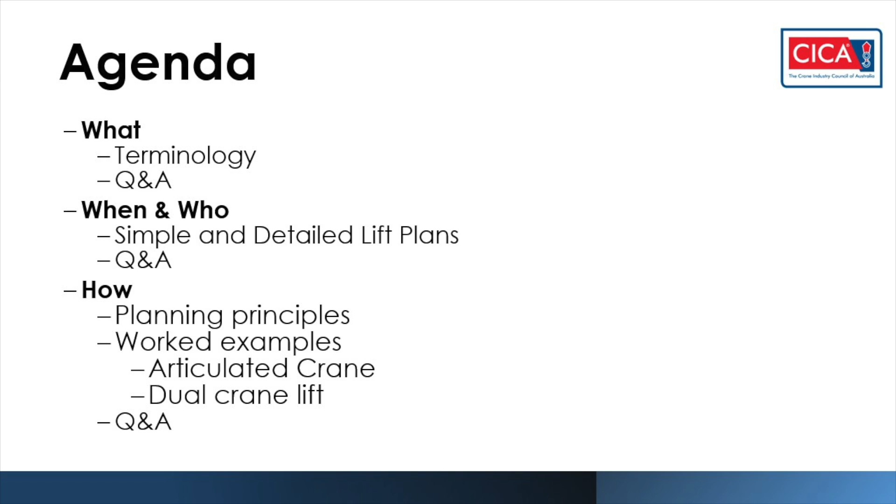If you're game enough to stay with us for the full hour and a half, I think you'll find some very helpful tips that Stuart has collated around what he has found in the industry out in the field. These aren't meant to be things that you have to have 20 years of lift planning experience to understand, but something you might be able to take away today just to be mindful of when you are seeing a lift plan for the first time, give you a bit of a head start.

So in the terms here, I want to just highlight 5 different terms, and we'll address these a little bit different as we go. There's really lift study, design lift, engineered lift, lift plans, and lift procedures all seem to be bantered around in the field without a single point of description that gives any sort of clarity, because I think a lot of these will be used interchangeably.

And that's why we wanted to spend a little bit of time talking about what our assumptions are for this presentation, so that you know when I refer to something as lift study, it may not be what you call it in your business, but it's for the sake of this presentation what we refer to it as. Additionally, we'll talk about what's on the horizon for even some of this clarification, as I mentioned before.

So firstly, I want to reset the topic of lift study.

I don't want to talk about lift studies as they might have historically been ten years ago, where they were a glorified lift plan that included a lot of detail. You could almost consider the lift study as a lift report. These were historical ways of completing a lift study.

What I want to talk about in the current state of play is the lift study being more of a methodology assessment. I've got two examples here to try to highlight this stage of the process that's occurring.

Many of you might host high-risk workshops. At the early stage of these workshops, you'll be evaluating the feasibility of different options for your lifting activities. Constraints that may dictate which option you select could relate to site access, and what's available on site for not only the crane to perform its work, but nearby obstructions. Is the site a postage stamp?

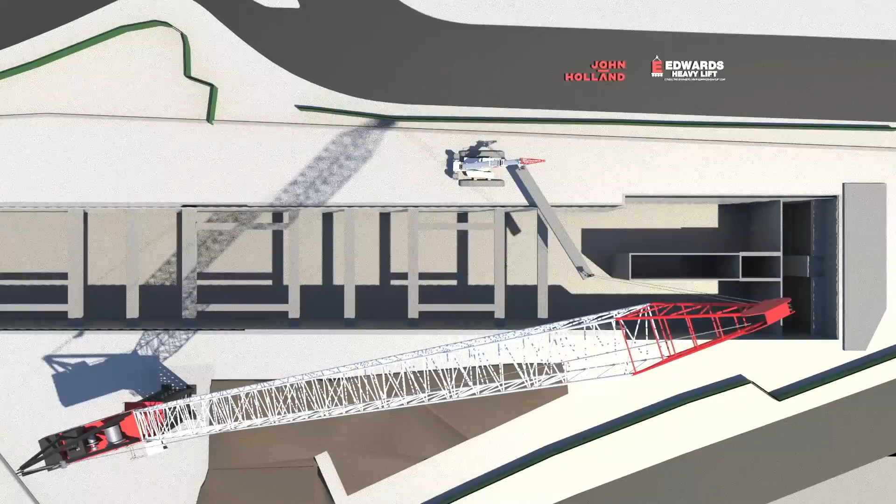The crawler had 5 parts of line with a substantially slower hoist speed compared to the tower crane's 2 parts of line. Communication was key, and the secondary dogman checked the alignment of the tower crane boom and the hoist rope while the crawler picked and carried.

This was critical to the operation, as the crawler was at 90% of capacity, where a minor difference in alignment could have pulled the tower out of radius and side-loaded the boom. Stuart will go into more detail about this and why it's an important thing to consider.

It's the actual side loading of the boom. When we talk about multiple crane lifting, it's more than that, and I'll elaborate slightly. That's a very critical area in the lift planning stages that needs to be understood.

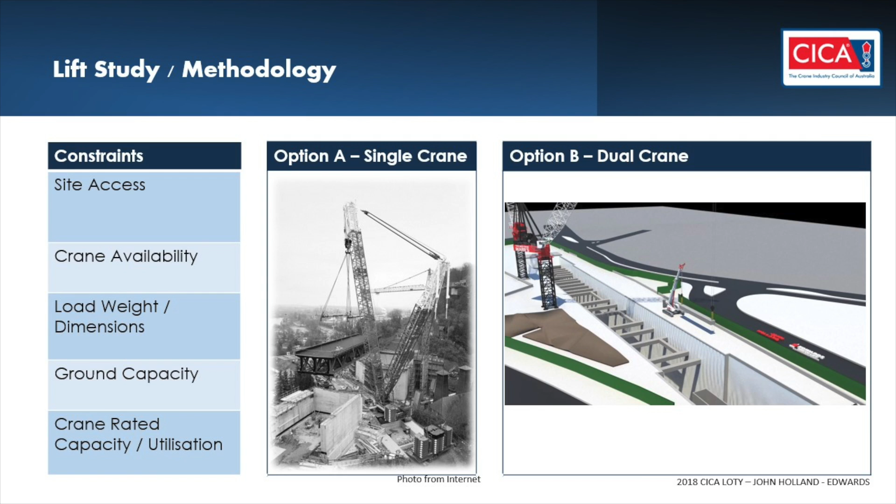So I mentioned resetting the conversation around design lift as well. Design lifts, I want to set a baseline, are defined formally in Australian Standard 2550 Part 1. This is the definition. I put it in here not because I want to read it to you, but I think it highlights that through our sloppiness or looseness in terminology, the original intent of a design lift has been lost in industry.

Now design lift is synonymous with lift planning. If you go back to Australian Standards 2550 Part 1, it really centered around the need to make an adjustment on the crane to consider an extraordinary lift. And I just want to throw out, for controversy a little bit, the notion of an extraordinary or temporary lifting operation. How many of you would consider extraordinary lifting to be installing bridge beams or putting in concrete precast panels?

These things are now commonplace, and we sometimes refer to them as requiring a design lift, but that's not its real intent. I'm going to implore you to consider we stop using the term design lift, because it's a misnomer from its original intent. To be fair, the Australian Standards are in the process of reviewing this standard, in particular Part 2550 Part 1.

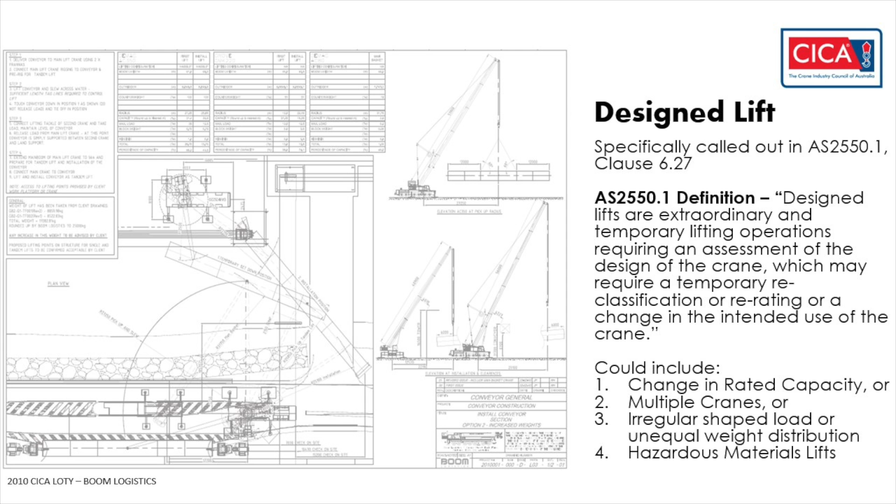The design lift definition will likely be revised to be more representative of industry practice, or potentially deleted altogether, to really focus on things like lift planning, which is more commonplace and common vernacular these days.

So the other term that gets bounced around, synonymous with design lift and lift studies, is this notion of an engineered lift. To add to the confusion — I'm not trying to throw Australian Standards under the bus, because CICA is certainly involved heavily in them — but I do want to highlight that if you're looking for standards to bring clarity, there's some confusion arising here.

So engineered lift is not actually defined in any crane standard. It's only defined in a rigging standard for chain slings, and when you read it, it reads just like the design lift definition we just looked at. I think this exacerbates the confusion, the problem. What we're hoping here today is to stimulate some conversation about how this might be clarified and resolved.

It is important, though, that we do make a place for engineered lifts. Why I bring that up is the design lift definition in the previous slide does not actually mandate the need for an engineer. However, as you can see in these activities listed here, I would make the argument there are clear reasons when an engineer should be engaged.

And it's not just to keep engineers employed, but to deal with particular activities that are beyond what's common in lift design and using cranes to their rated capacity. There's a space for this in what I'll refer to as sharpening the pencil — making sure your I's are dotted and T's are crossed when dealing with things like considering re-rating the crane, or rigging arrangements that have unknown or atypical forces brought through them.

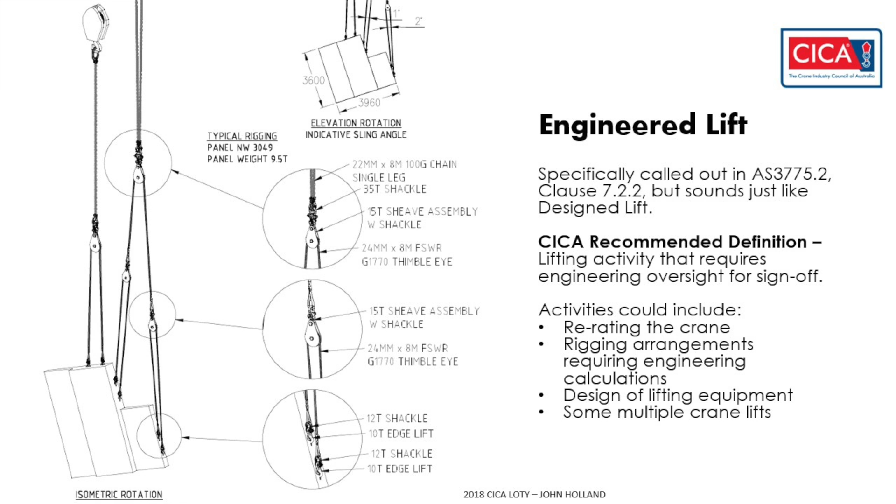So what I want to spend most of the time talking about today is actually resetting the conversation. I might be using words here that don't line up with your existing company policies, but I'd ask that you consider this a conversation, and hopefully the Q&A will enlighten some of the difficulties you might have with what I'm saying. What I want to focus on, instead of design lift and engineered lifts and lift studies, is lift plans.

More and more these days, lift plans have become the mainstay, and they've become the summary for what is used in the field and also what is developed in the office to take to the field. In many cases, they're the guiding light in lieu of design lifts, engineered lifts, and lift studies.

So what I propose is looking at this in two halves: indirectly documented and directly documented. Within directly documented, not always going to the full extreme of an engineered lift plan developed by the engineer—there's a place for a simple lift plan, and a place for a detailed lift plan done by non-engineers or engineers. I hope this will give us a chance to talk through this.

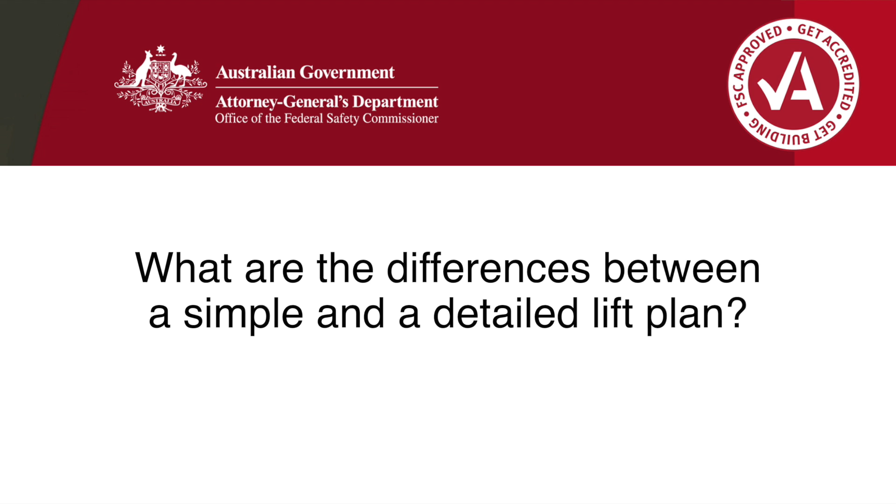There's different codes. Queensland's very specific in that, and there's other information, but primarily we use a risk management approach in how to get that.

By the way, don't mean to talk too much, but I loved your movie analogy. Very good in the risk management sphere. Not everything can be high risk, nor should it be. It's a good one there.

Just a bit of context about those two, simple and detailed. Coming back to your question about what's simple versus detailed, looking at that graph on the slide a second ago, we don't want the simple to be too onerous. So you'll see less detail within the simple lift plan. I'll show examples where we've almost amalgamated a pre-start form with a take 5 and elements of a lift plan. The detailed lift plan doesn't have those pre-start take 5 risk assessment elements.

The aim of the simple is this is a lift plan that's done in the field and on site. It's most likely going to be done with a crane that's a single crane, single hook lift activity. It's not done with intricate CAD details. I'm only going to show you the first page of the simple lift plan form. It doesn't go through the detail around doing a hand sketch, and I think that's often overlooked or neglected in industry. The value of getting the crane crew to talk and just sketch it out - it visualizes what's about to happen, and things can arise in that conversation.

The detailed lift plan will spend more time focusing on the impacts of a crane doing a series of sequenced events, and you'll see that we've broken out the detailed lift plan to consider the weight of the load, but also the capacity of the crane in that configuration, what's happening when the crane is slewing or traveling, and then lastly what happens with that load in the crane when it comes to placing the load. So we're looking at things in the detailed lift plan that relate to interaction between one crane and two cranes, and that's where we start using some of the multi-crane lift deratings outlined in 2550 - the typical 20%, 33%, and so forth.

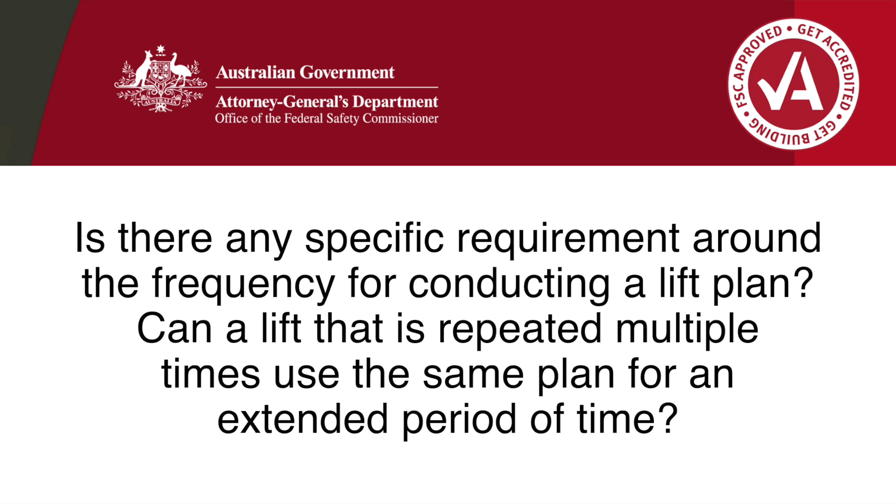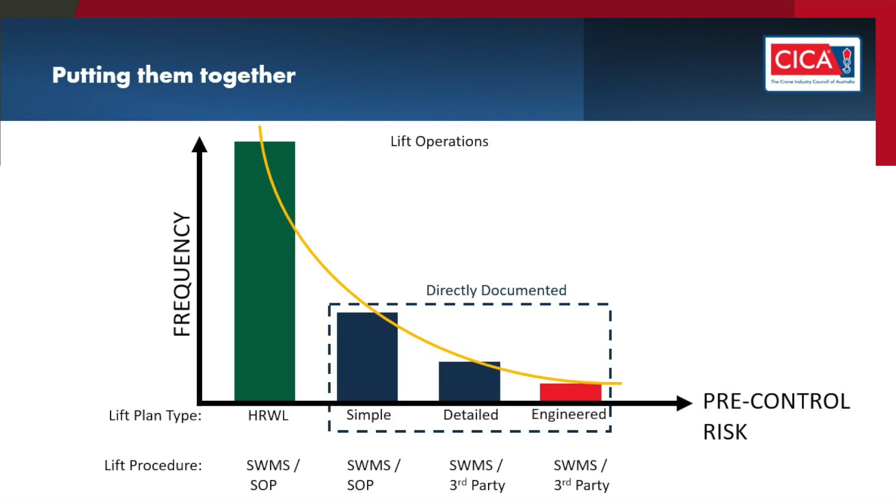I think that previous graph, I might go back to this one. The point was to keep people thinking. It's easier for people to mandate something versus use their brain. The reason to equip people with training to do simple and detailed lift plans is as much about knowing when to elevate it to a higher level of capability as it is about determining when the risk is mitigated by addressing the worst case scenario.

Like using Mohammed's example, which is very common. I certainly hear grief from members asking the common sense pub test, if you will, around whether, if you've designed for worst case, that shouldn't be sufficient if other conditions haven't changed.

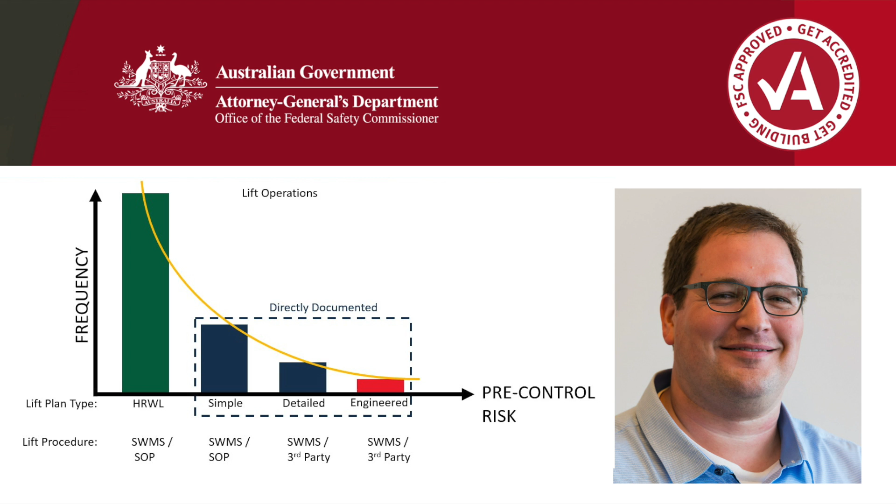So if you're picking and placing multiple loads, even within an existing crane setup where the crane's location isn't changing, but you've assessed the condition in the lift plan to its worst case scenario—whether that's the farthest radius or the heaviest load, whatever you've selected that scenario to be—given all other conditions are less than that, the first assessment should be sufficient and cascade through the others.

The classic example is the sound barrier install. Even to a degree you saw in that animation video, there was a repetitive load, even though the orientation of the load changed each time. I don't think a full investigation was completed each individual time, but it was done based on the worst case and then backfilled from there.

I think the more we can get people to use some of that common sense, hopefully that will mitigate the excess, which again makes things trivial.

If you didn't like The Incredibles, think of it in a different context. How many buzzers does a piece of mobile plant have? It has a slew buzzer, a backup buzzer, a horn. If you start creating so many buzzers or slight variations of each, you start getting lost in what it is. We've got to reset how overly cumbersome we've made something.

I will try to give some guidance related to when you might choose to do the lift planning in the next slide. We've got other questions coming up at different points, so if you can hold them over to those, that might be the best way. Keen to hear the next section, please, Brandon.

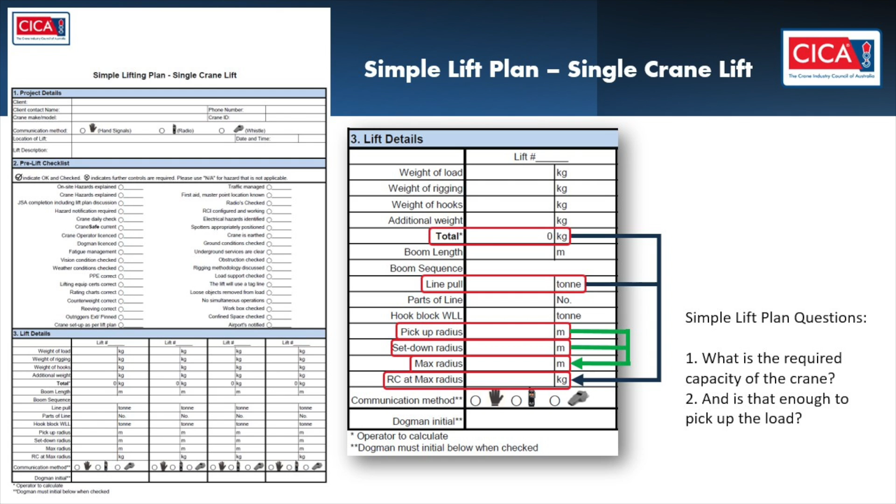So in this simple 10 lines, you're trying to assess what is the weight that needs to be picked. That's our first question. What is the required capacity of the crane in that radius configuration? Is that enough to pick the load up that you'd like to pick up? That's as simple as it gets. It deals with talking with the crew on site to try to develop this and then come out and perform the lift.

I'll ask a bit of a controversial question in this slide. When we use a simple lift plan, this idea of, and I'm asking the question more so from just relying on the high-risk work license holder to determine it. So I'm not saying this in the context of going from a detailed lift plan down to a simple lift plan. I'm talking about going up from a high-risk work license holder managing the rated capacity of the crane and the desired load to be picked to justify the need for a simple lift plan.

First question to ask, does the risk level warrant it? Do your own internal policies say we need to perform a lift plan because of those 5 options that I raised before? I put in here the value of the load because the essence of the simple lift plan is to document the thought process to say you've accounted for, I would say, a general assessment of the situation. It's not the precision that a detailed lift plan will go through that we'll look at in a second, but it's a general review, which is why we are just saying what's the pick, what's the set radius, what's the maximum radius, are within rated capacity. That's the other part of it.

Sorry, when I say risk level warrants, the percentage of capacity. It doesn't cover off things that are operating necessarily at the 90%, 95% capacity of the crane, because you want to have more detail around some of the rigging and so forth, but it is a good process. So would you use a simple lift plan to lift a person?

And that can be something that you already know the answer to from within your business. But with what we've described, is there reason not to? Is a simple lift plan adequate? That's probably more the question.

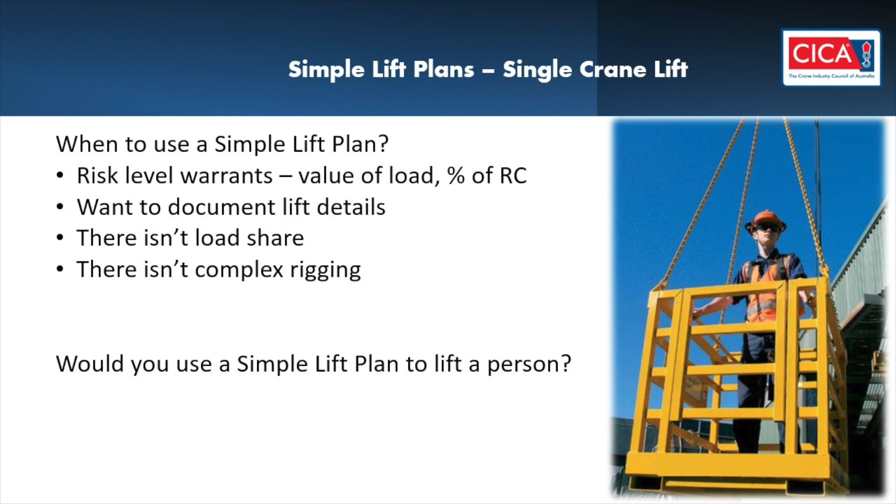If we look at triggers of lift planning, often lift plans are triggered by rated capacity or the weight of the load, as we said.

Here's a quick graph, and I bring up this example of a tower crane because we can put to the side, for the time being, any sort of ground conditions with it being on starter legs. If you look only at workbox as a function of crane rated capacity, at the worst case scenario for this crane, you will only ever get to 23% of the rated capacity of the crane with a fully weighted workbox. That workbox is 750 kilos. The rated capacity at its farthest radius, 70 meters, still has a capacity of over 4 times the workbox load.

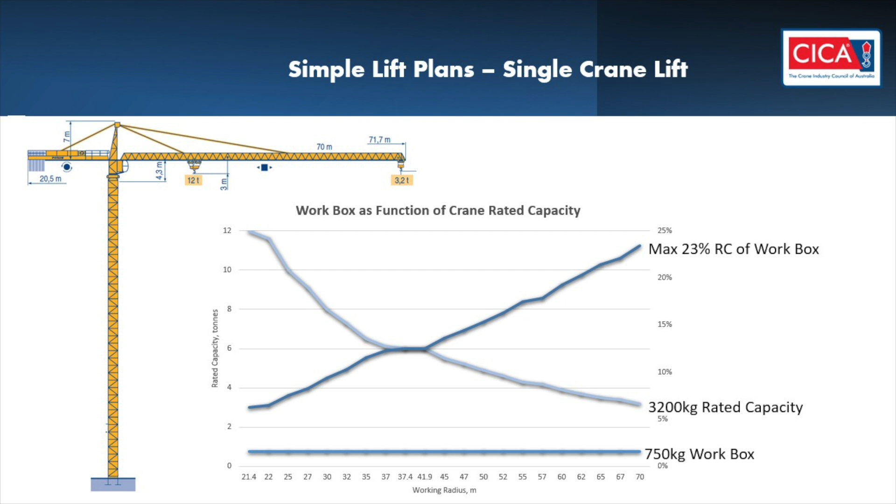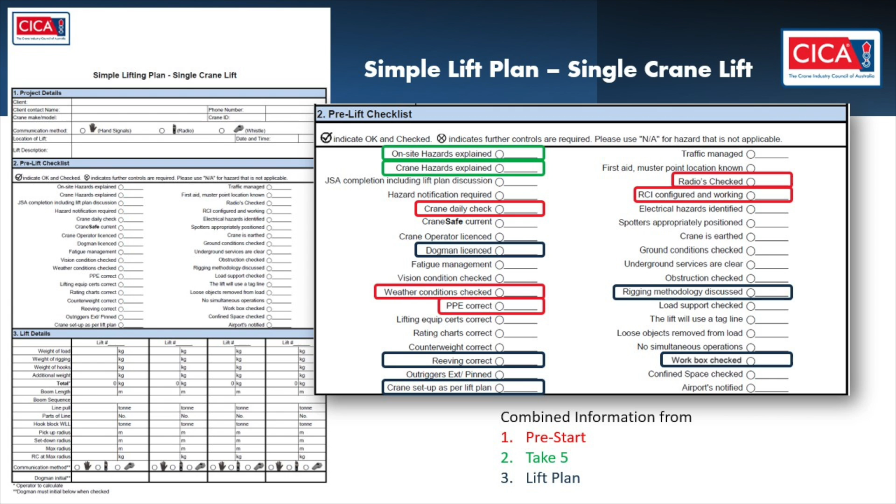If we go to the next slide, I've done a quick example to try to convince you of the options and how we can cater a lift plan for a workbox. Within that pre-lift checklist, we're talking about rigging methodology discussed, the workbox being checked, the reeving correct, which is related to the crane configuration in that instance, and then this lift plan that we'll go through in the lift details is confirmed. That's the radius that we're going to be working to.

So if we just look at these numbers again, if you're picking up a workbox of 750 kilos, your line pull for this particular crane is 3 ton. The pick radius might only be 15 meters. The set down radius might be 15 meters again, because you're bringing the workbox back to its previous location, but you're trolleying out to 30 meters to either reach something, a facade, maybe a chimney, whatever the scenario is. I'm not here to contemplate that, but the idea of going out to a further radius.

In the Australian standards, it talks about using cranes with workboxes. When they've been selected to do that, it only requires a rated capacity of a 2-to-1 ratio. You're 5 times greater than the minimum requirement of the Australian standards, if I try to bamboozle you with different ratios to confuse the matter.

But I would make the argument that a simple lift plan, in the lift plan segment of this—obviously you might have different protocols ensuring communication, having backups for communication, things that relate specifically to a workbox, those are ancillary to this lift plan—but actually setting up the crane and making sure the capacity of the crane is okay, and you've accounted for lift plan oriented activities, I think a simple lift plan is sufficient.

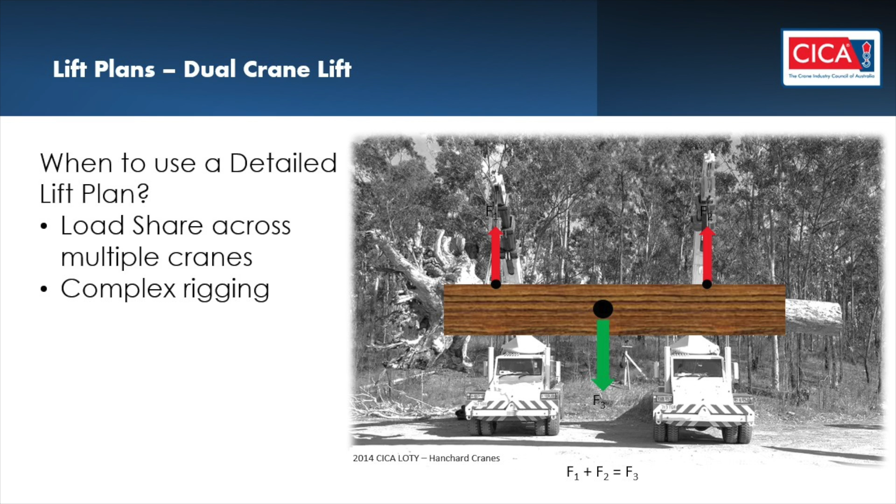The last part of this, you'll get more of a flavor for in a worked example, is the other contributing factors that we want to detail in this lift plan to a greater extent, and that's the consideration for the max outrigger load, ground bearing applied pressure, and bearing pressure that's allowed. There may be something in here for a stipulation of wind speed. Those things are able to be documented in this more thorough or more detailed format than in a simple lift plan.

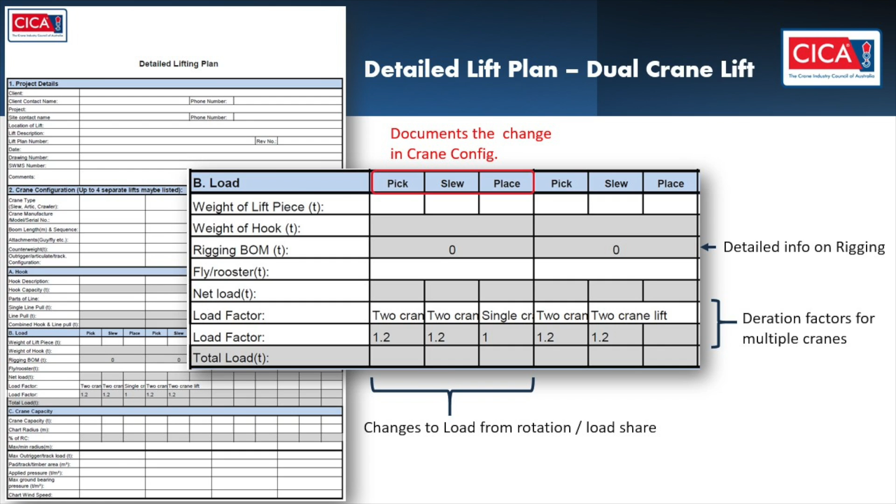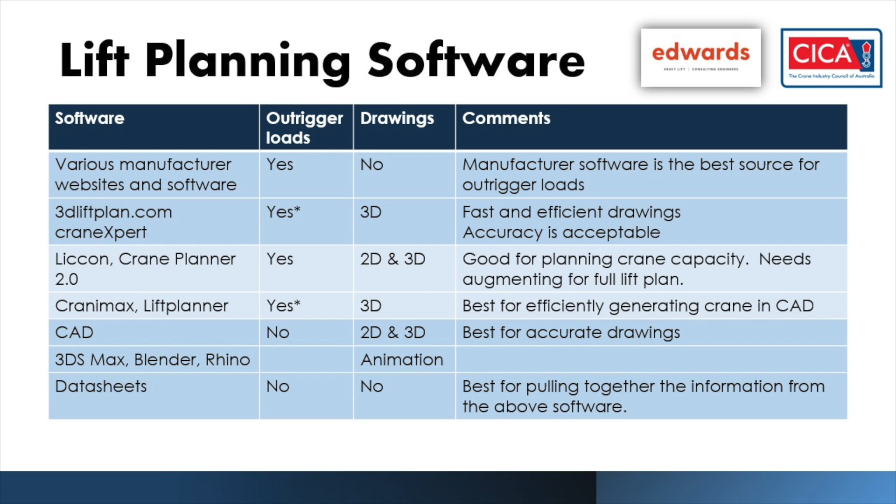Your other sort of animation-type programs—I think the animations are becoming a lot more efficient these days, and you'll probably see more and more animations as technology gets better. And data sheets—thanks for that.

There's been a couple of questions come through. One was regarding ground conditions playing such a critical part in determining lifts. In this case, it was a question from a civil construction company saying they typically automatically go to requiring lift plans simply based on ground condition requirements and needing to validate those. How do you think that fits into the simple-hire order, and when do we need an engineer, when don't we? We've had a bit of description about the planning software, but that's only giving one side of the story, isn't it?

It's very relevant to what was discussed at the last webinar around differing terms—allowable ground pressure versus peak ground pressure, ultimate ground pressure. If geotech is being provided to the site based on this contractor's requirement, I think you can see that even in the examples Stuart showed where ground pressure is provided, the previous point addressed a month and a half ago was about the discrepancy in what information is being provided. If that's wrong, it doesn't matter what lift plan you use. I think you could still get away with a fair bit of just simple calculations.

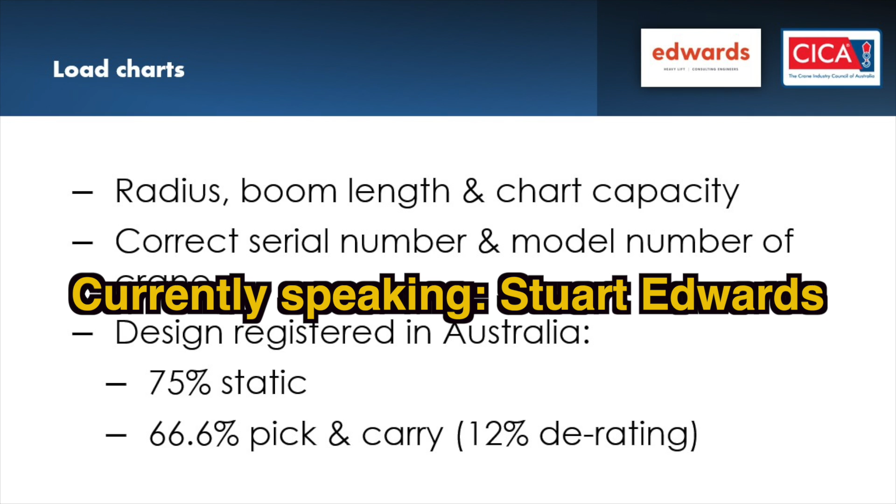So load charts, I'll just quickly run through what to look for, and then Brandon's going to go through a simple example of how to read a load chart. Obviously radius, boom length and chart capacity are the main big ticket items you need to look at.

Other considerations: correct serial number and model of crane. One company I worked for owned 10 cranes that were the same model number but had different serial numbers, and the difference in chart capacity between them was about 10 tonnes. The factory was improving the crane as they made new serial numbers, so it can be quite important to get the correct serial number chart.

Design registered in Australia - this is from the old Australian standard, 75% static and 66% pick and carry. Australia has now adopted the European standard. It's still 75% static, but the centre of gravity is within the 4-degree tipping line. It's a different method for determining the pick and carry rating, but it still roughly equates to similar numbers.

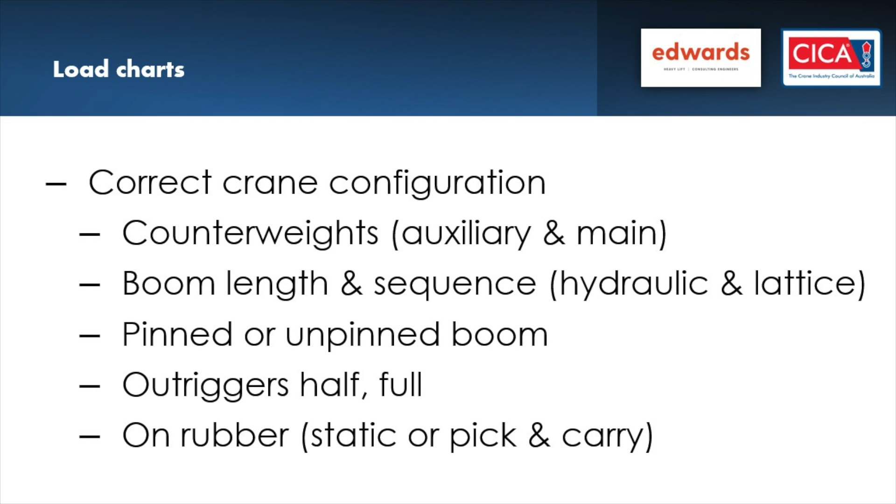The correct crane configuration: counterweights, boom length, the outriggers, whether it's on rubber. There are some on-rubber charts that are static charts, believe it or not, or they're pick and carry, and whether the boom is pinned or unpinned.

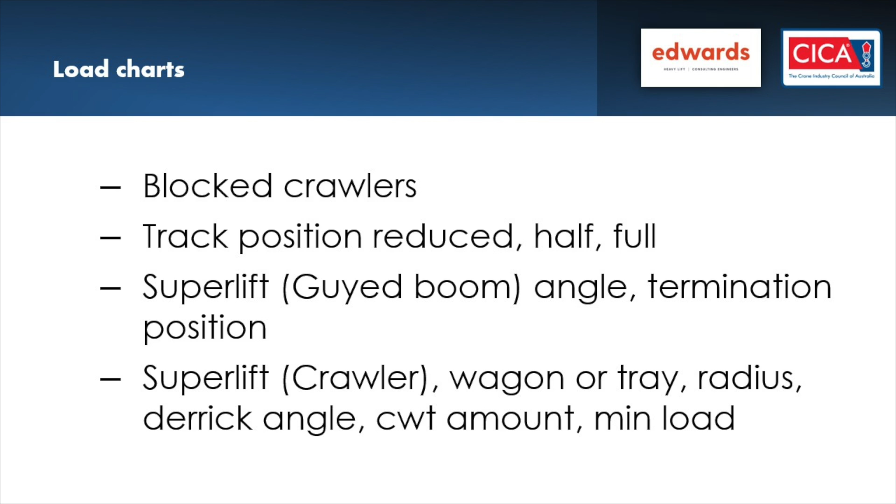Other configurations: the tracks are retracted, the superlift, different angles on the superlift, etc. The slew angle - most modern cranes these days stick with a 360-degree chart, although there's still quite a few cranes on the market that have restricted slew charts.

The deductibles - a lot of mobile cranes, the hook needs to be separately allowed for. If there's a fly stowed on the side of the crane, or catwalks, working at heights sort of things, they're all quite often deductibles from the crane.

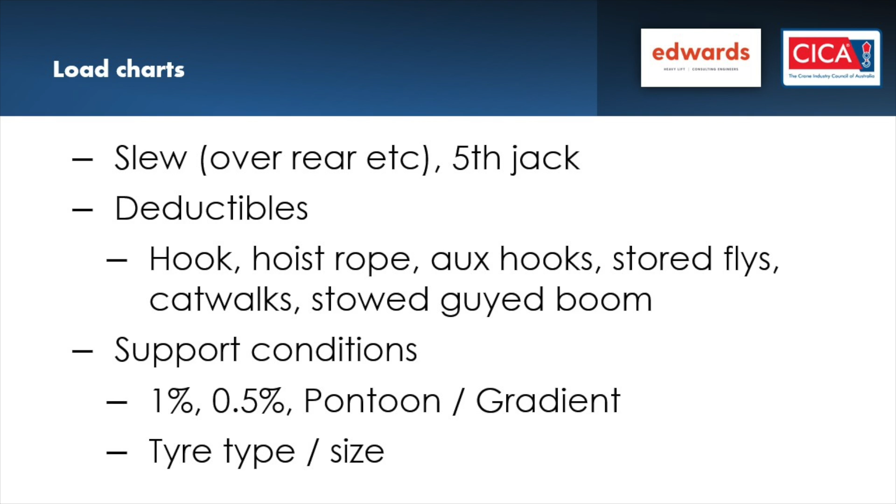The other thing is support conditions. The Australian standard had 1% as how level the crane needed to be. As manufacturers have got more adventurous wanting more capacity out of their cranes, particularly in the bigger crawler cranes, they're putting more restrictive requirements for the level - for example 0.5%. I've seen one crane where the manufacturer requires 10 millimetres out of level in 10,000 millimetres. So that's billiard table flat.

The environment, and whether interpolation is permitted or not. In general, interpolation - that is, if the capacity is given at 5 metres and 6 metres, and you're actually lifting at 5.5 - in general that's not permitted unless specifically approved by the manufacturer.

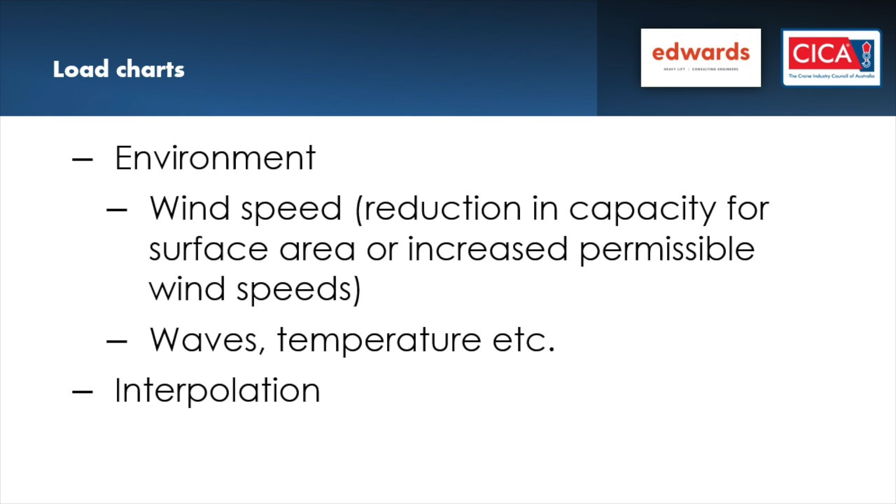After this incident, Workplace Health and Safety Queensland interviewed 40 crane operators. Of those 40, 38 did not know that there was a side slope derating for the cranes - they thought the computer did it for them automatically, but in this case it's a manual calculation. Of the 2 that knew a derating was required for the side slope, none of them knew how to do it. So I'll pass over to Brandon just to go through this example.

Yeah, thanks Stuart. I think those stats, even though we're here talking about lift planning, the stats that Stuart just conveyed - 38 out of 40 people not having a full understanding of how to do this - warrants a quick discussion, a digression, because this information we're going to go through here today ends up only being one line item of a lift plan. No different than all those examples about the correct configuration and so forth that Stuart talked about. Knowing the right input to put in is only going to give you the best option for a correct answer. If it's garbage in, garbage out, we're not winning with performing a lift plan.

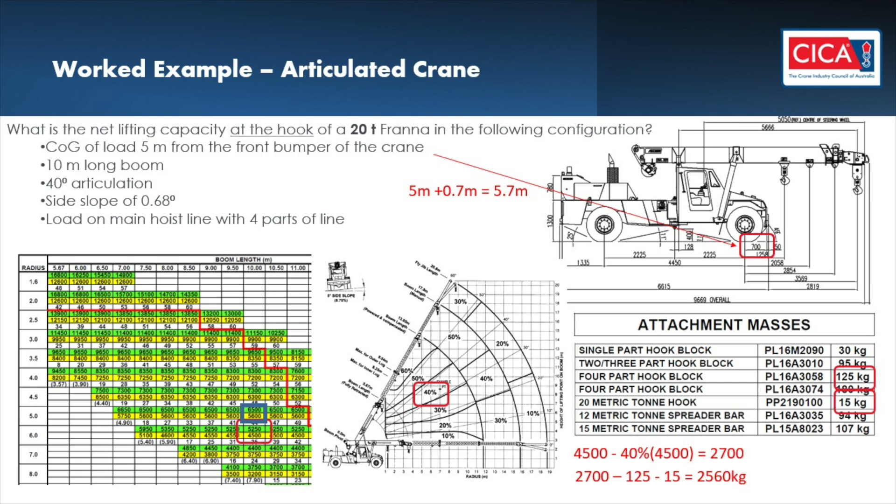I want to step aside and look at this option because it's so common, I'd like to share it with you.

This is something CICA is working on, how to release this as part of this lift planning workshop to those participating who want to utilize this service. A few years ago, CICA and Multiplex created this automated setup, instead of using the manual load charts we just looked at. You can select the AT20 Franna using the winch, then put in the boom length and select the radius.

You still have to figure out it's 700 millimeters from the front bumper. With that information, you can put in the articulation and the side slope, and it will output the allowable load. What I want to highlight in that bottom right-hand corner is something we've added to this software which I hope the industry finds useful. Those four columns are the scenarios that could happen with that boom configuration, the boom length and the radius.

Too often, as Stuart mentioned before, if you recall, a 360-degree chart - on a slewing crane, modern cranes now produce variable charts based on slew angle. He's 100% correct that when you're doing general planning in the simple lift plan option, you should be using the 360-degree chart, or at least be conscious that you're using a specific slew angle chart, because the slew angle chart will always give you a better capacity than the 360-degree chart.

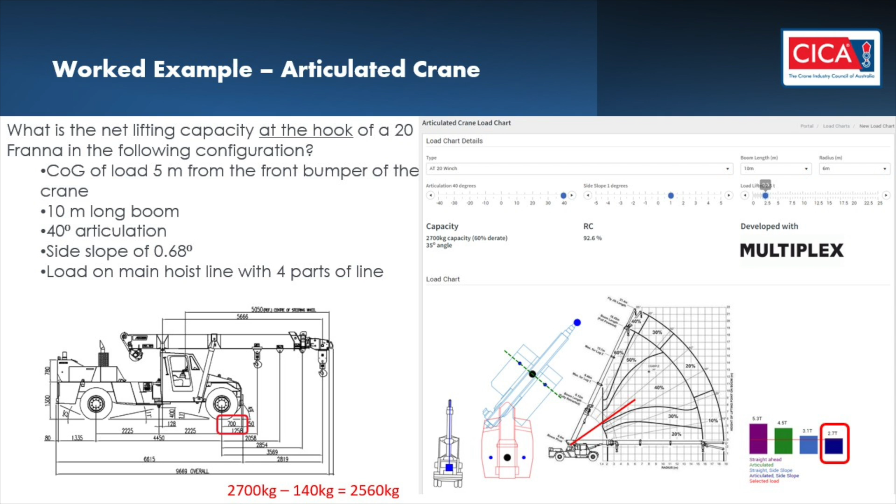What we hope to accomplish presenting the information this way is that when you're planning, even if you're straight ahead at 5.3 ton, you're also cognizant of how quickly that capacity falls off. We're talking 50% there, down to 2.7, if the driving scenario - whether articulation or side slope - changes. In doing that, you can plan your lift at 2.7 ton, even though you might be able to pick the load at 5.3 ton capacity. I just want to highlight this because it's such a common misconception.

The next two slides are just some key lift plan errors that I commonly see with lift plan reviews. The outrigger load provided - the CICA presentation provides quite a lot of detail about what loads to consider, because the software produces an outrigger load or a track load for a specific scenario, and it doesn't cover everything. You need to manually go through the steps of the lift to get the maximum, and the maximum may not be the actual lift that you think it is.

The bog mat being structurally inadequate is becoming a little bit more common. The telescoping or luffing of the booms - making an assumption that the crane can telescope, or that when the crane is in luffing fly, the main boom can be luffed. The luffing fly configurations can have huge minimum radiuses. Luffing of the main boom component is often not permitted.

Deductibles - not allowing the correct deductibles - and also not being aware of minimum weights. Some cranes require, for example, a minimum of a 10-ton hook, even though you might scratch your head and wonder why. There's obviously various reasons behind those minimum weights, and so selecting a lighter hook, for example, may not be acceptable.

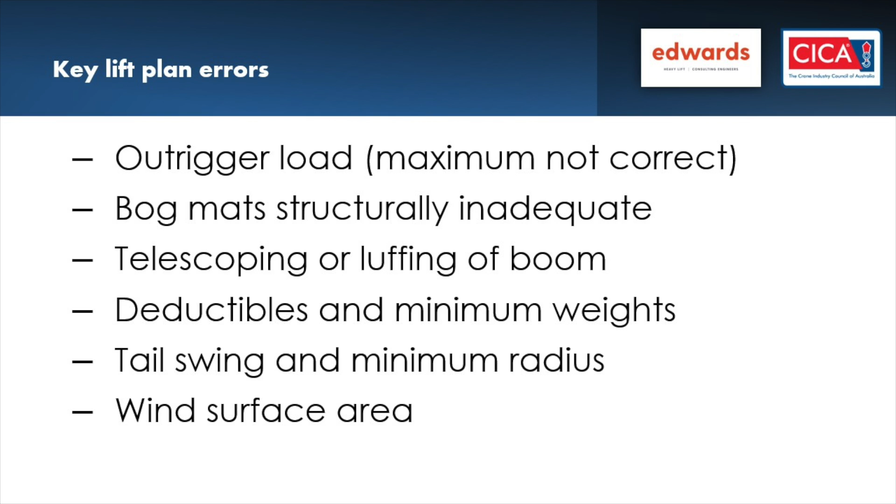The tail swing - so looking out behind the crane, not just where you're lifting - and the wind surface area. On the rigging side of things, load stability, and I'll show a demonstration of that. Statically indeterminate arrangements, I'll also explain that in more detail, but it's basically that the load share may not be ideal, like a four-leg chair - if you stick a coin under one of the legs, it might be rocking on two legs.

The lift point design - in particular, not the actual structural design of the lift point itself, it's just that the lift point designer is not aware of these two other items, the load stability and statically indeterminate arrangements. The center of gravity - either not accurately determining it, or some sort of calculation error - and D/D ratio, so basically the bearing of slings on their connecting elements or on loads.

That's another whole presentation. You just can't connect shackles and slings together and assume that they're compatible.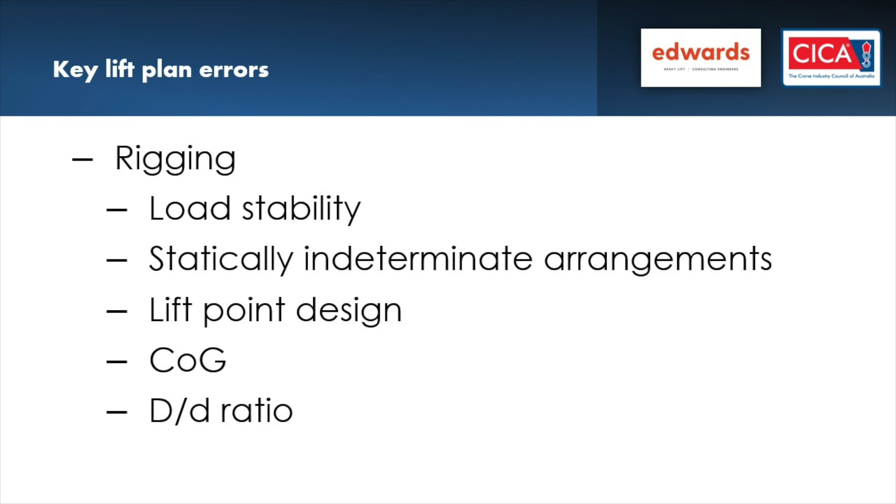Planning considerations - clearance is an issue that needs to be calculated. These days, with lift planning software out there, it's becoming a lot easier to calculate these things accurately.

The deflection needs to be considered. Hydraulic boom cranes deflect a lot more than lattice boom cranes. There are some funny scenarios, say for example, a hydraulic boom crane lifting an aircon unit onto the top of a building - the boom bends a bit like a banana. They can place the load onto the roof, but as the load is placed down and the boom straightens out, you might have a clearance issue.

The boom heel pin location - on this particular crawler crane, the heel pin is where the boom pivots from at the bottom. It's in front of the center of slew and down low. On an all-terrain crane, it's behind the center of slew and up high. Quite often, all-terrain cranes in close quarters have much better clearance than crawler cranes, but crawler cranes have their advantages - being a lattice boom, it's a lot stronger.

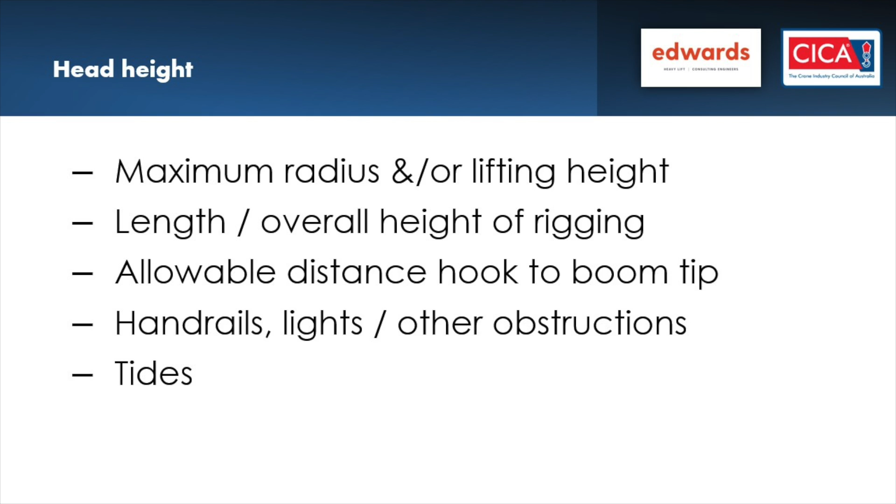The head height - how high you need to lift the load. For beginners, it's easy to just look at the chart and see that at X radius you can lift a certain load, but forget that you need a certain length of boom to lift up and over things, including handrails, lights, or other obstructions. Also consider the allowable distance from the hook to the boom tip - the hook can only go so close to the top of the boom, it can't go all the way up.

This is an example of a head height check. The mobile crane you can see is poking through a door shown in red, and this was all checked with a 3D point cloud scan of the site. This vessel needed to be lifted over the operating floor, and the gantry crane needed a specialised lifting device. It wasn't really about the capacity of the crane - what was complex about this lift was the vertical geometric clearances.

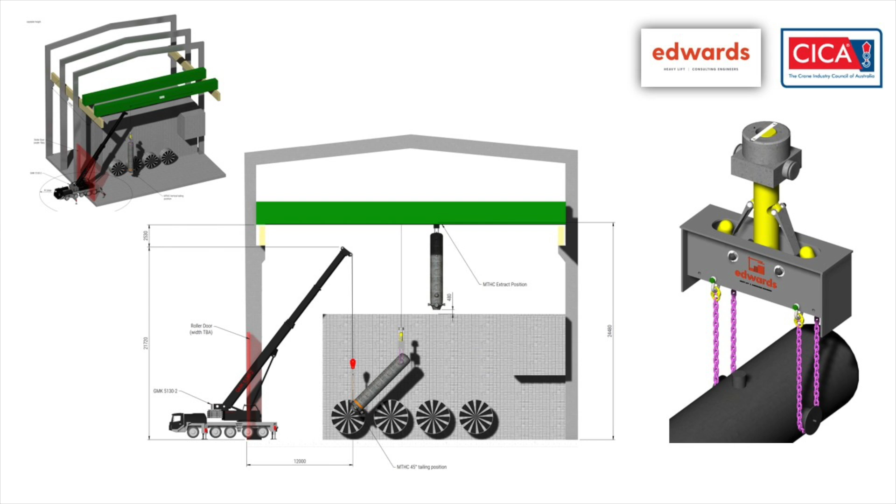Other planning considerations: tail swing, minimum radius, site access and egress - particularly on city sites with mobile cranes using dollies, where for axle loads the boom needs to travel on a little trailer behind the crane. There can be some quite serious planning requirements, including the space to actually build the crane, and any public areas or exclusion zones.

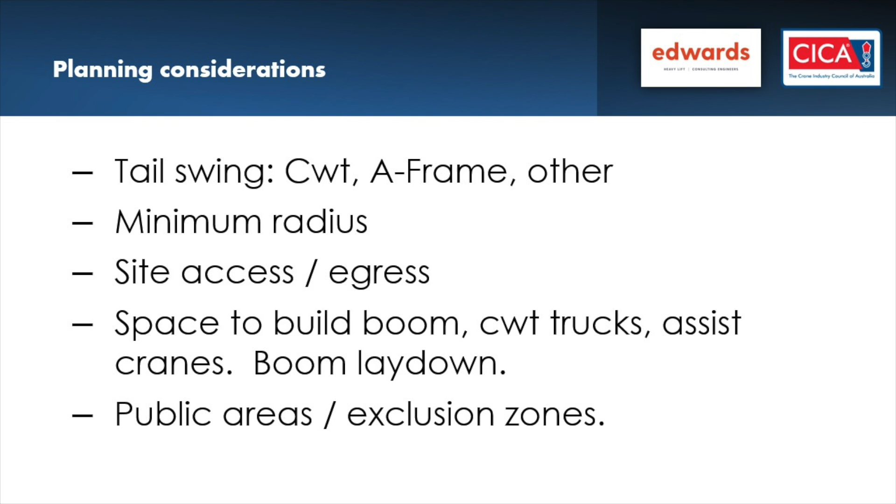That was a video of a load collapsing while being lifted. There are actually no rules as to when structural engineering is required for a load or certification. There are some site-based or union-based rules, like cages over 20 tonnes needing structural certification as a common rule, but it really comes down to the judgment of the lift planner to determine whether this needs structural certification.

Never exceed the manufacturer's allowable wind speeds. There are two parts to this. The load chart has a wind speed allowance - for some cranes that wind speed is consistent across the whole chart, while for others the allowable wind speed varies by boom length or crane configuration, and you need a detailed chart to find that answer. The second part is that the chart wind speed is based on a surface area of the load being 1.2 square metres per tonne. If you have a larger surface area than that, you need to reduce the permissible wind speed so you have the same equivalent horizontal load on the crane.

This video is quite an old one - it's called Big Blue, there's a whole documentary about it. I guess the root cause behind this incident, in which 3 people died, was wind.

The unthinkable was about to happen. What the hell is this? What's going on here? Okay, watch it, watch it!

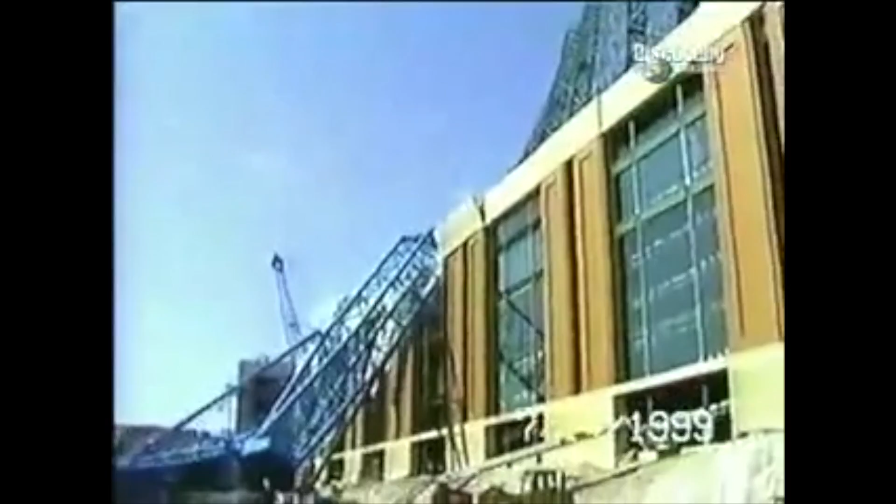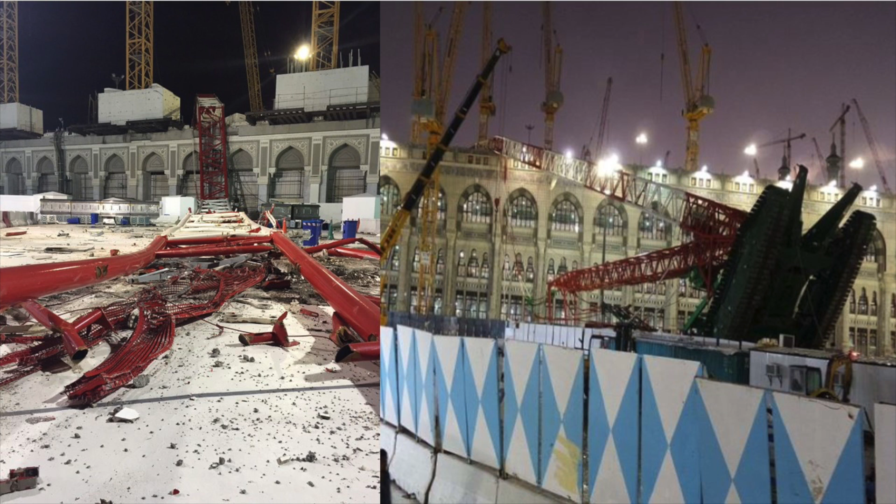CICA has a guidance note on how to calculate that, and most crane companies these days are now incorporating that as just two simple boxes in their lift plan - what the chart wind speed is, what the surface area of the load is, and its drag coefficient - to calculate a permissible wind speed.

I regularly see cranes in city locations that have no space to lay the boom down for bad wind. A lot of these cranes, the wind speed where you need to lay the boom down is 16 metres per second or so, which is not a large wind speed. So it does need to be included in your planning for the site.

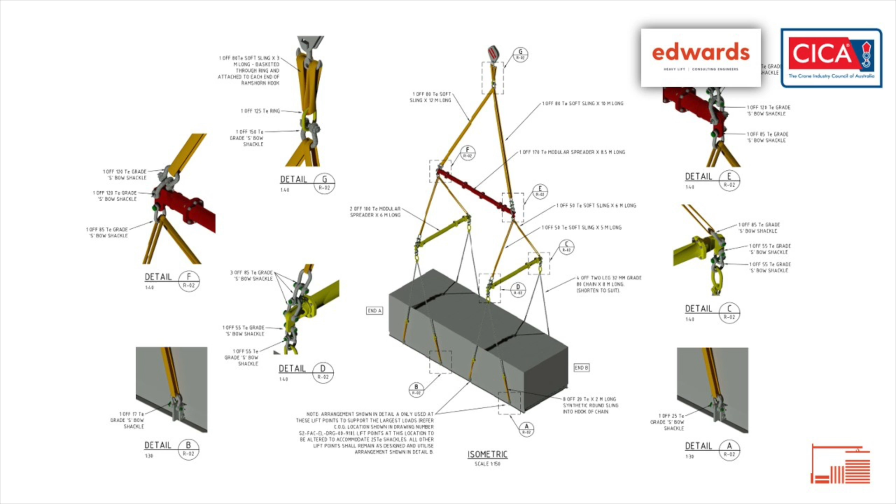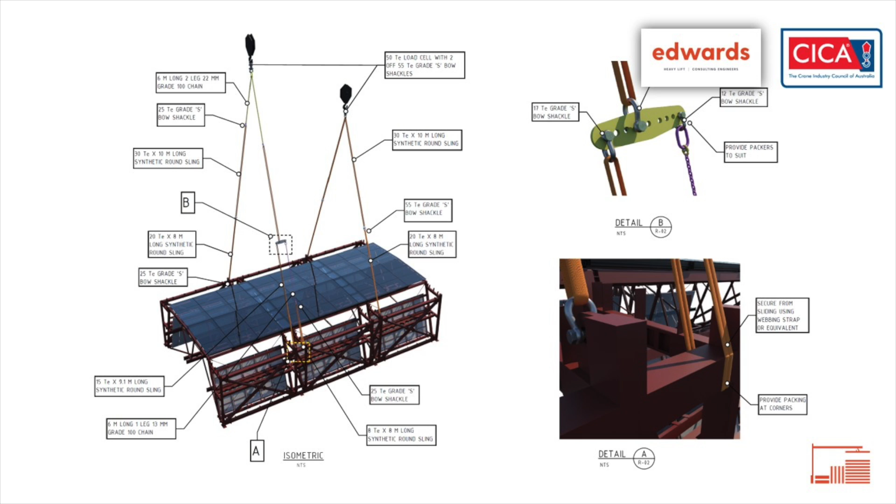These are just some examples of rigging diagrams. The first one looks complex, probably some pretty drawings, but generally it would sit in the detailed lift plan rather than engineered lift plan category. This one here, mainly because of the crane capacities above, we had some quite fancy ways of redistributing load, so this one would fit in the engineered category. You can see that multi-hole plate there that was assisting as part of that.

Spreaders versus lifting beams. I would say once a week somewhere in Australia, a combination spreader lifting beam would be bent because of the misconception of what they do. This one here is an example, snapped, they were lifting a 50-ton load. The data plate on the device itself was terrible, and if you didn't know what a spreader or a lifting beam was, you wouldn't know what the difference was. So, obviously they put 50 ton on something where it's good for 6.5 tons and snapped it.

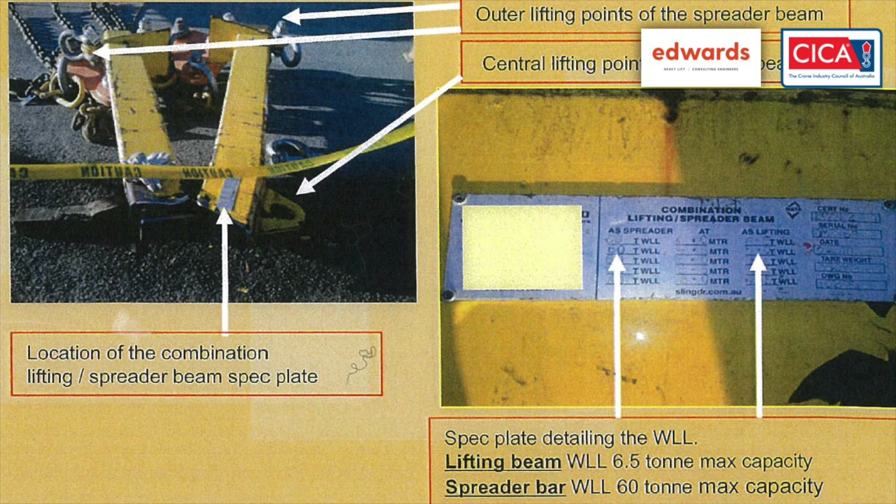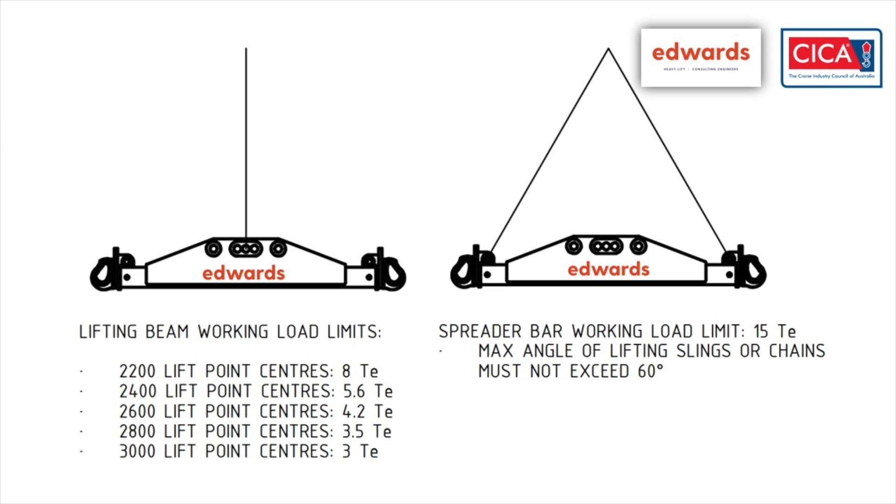This is a combination beam that we designed, and the data plate on it has clear pictures to show the difference in capacities, and you can see it's 3 tons versus 15 tons. So a lifting beam is in bending. A spreader spreads the load, so it's predominantly in compression.

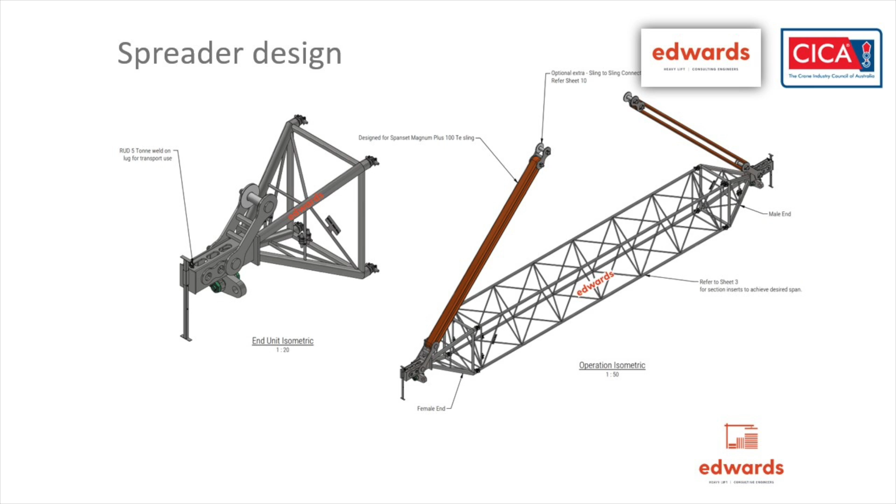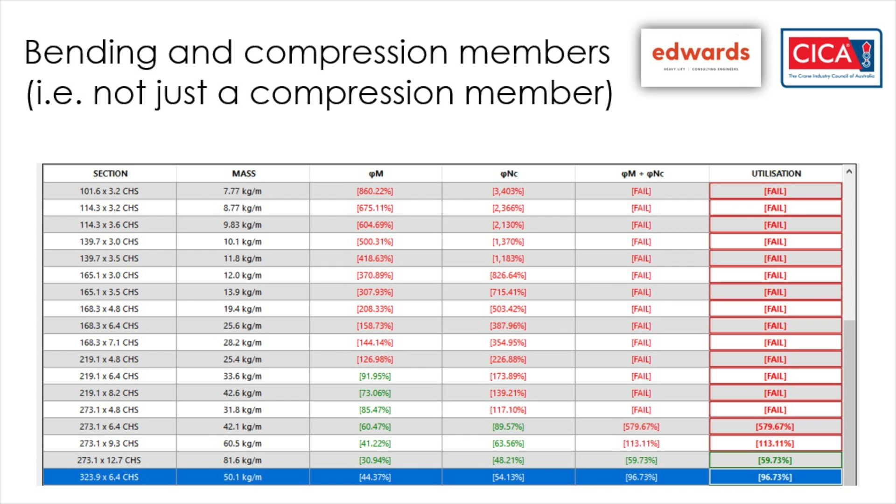However, spreaders aren't just bending as compression members. This is an example from a pipe spreader design. If you took the compression load only, you could get away with a 273 by 6.4 CHS at an 89% capacity. When you take compression and bending into account, it's at 580% of capacity. So you need to go quite a few sizes up to get the correct pipe size. The average design behind a spreader is that there's an included angle of 60 degrees above and plus or minus 5 degrees below.

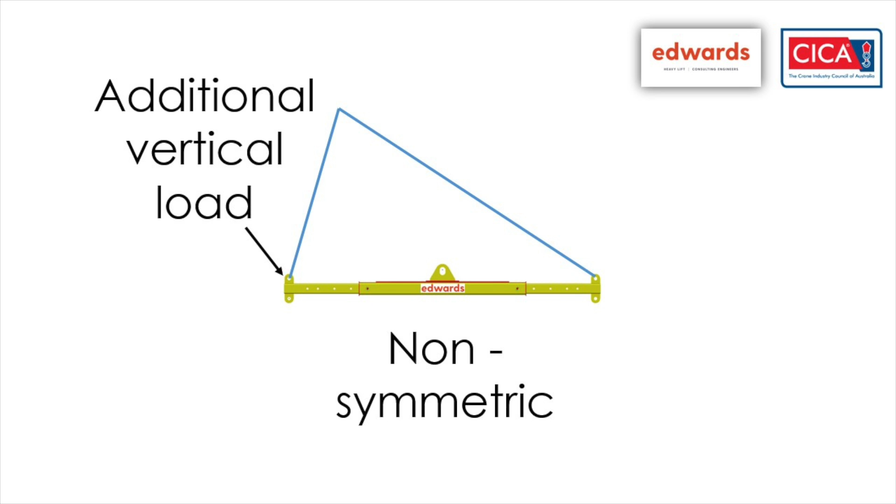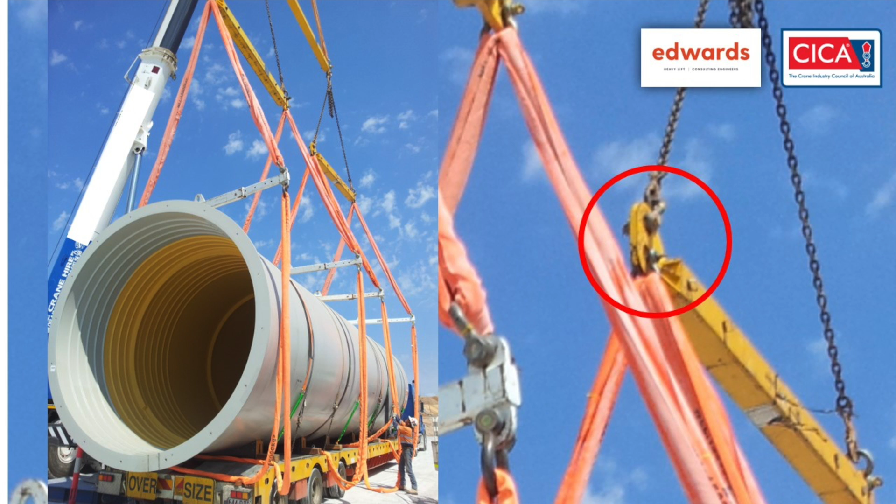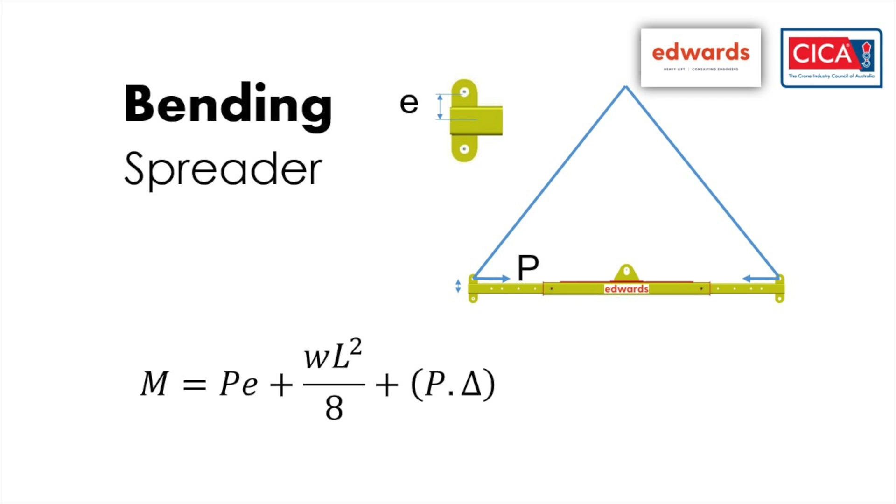This is an example where the spreader has been used upside down. You can see this little lug pointing up, that's supposed to be pointing down. In that design, the compression is supposed to be acting on this neutral axis. In our case, it's acting above the neutral axis, inducing more bending. The other thing is if you have a big angle below the spreader, you induce additional compression, and that needs to be checked structurally.

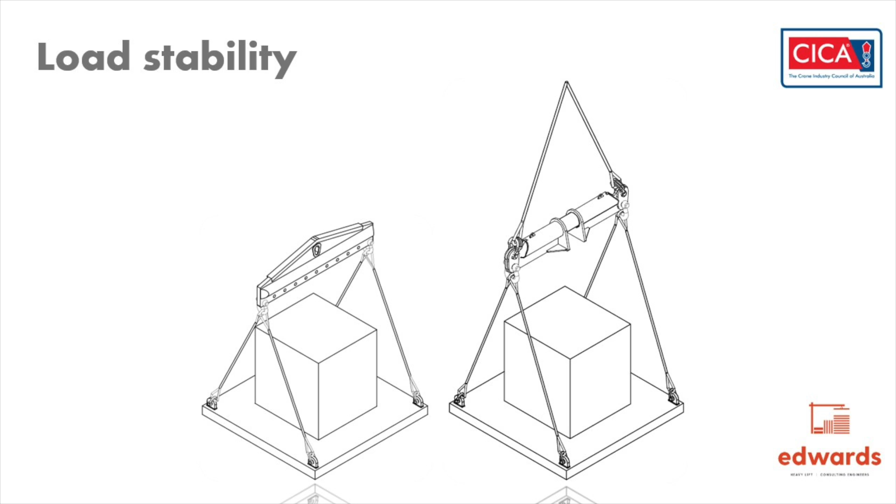Load stability. I've got a scale model which I want to show you. If you imagine you have this load to be lifted and the lift plan has the load on the right hand side. However, when you get to site, they say, oh sorry, we don't have the spreader, we've got a lifting beam, it's structurally got heaps of capacity, can we change it over? In this case, because the center of gravity is above the lift points, the answer is no.

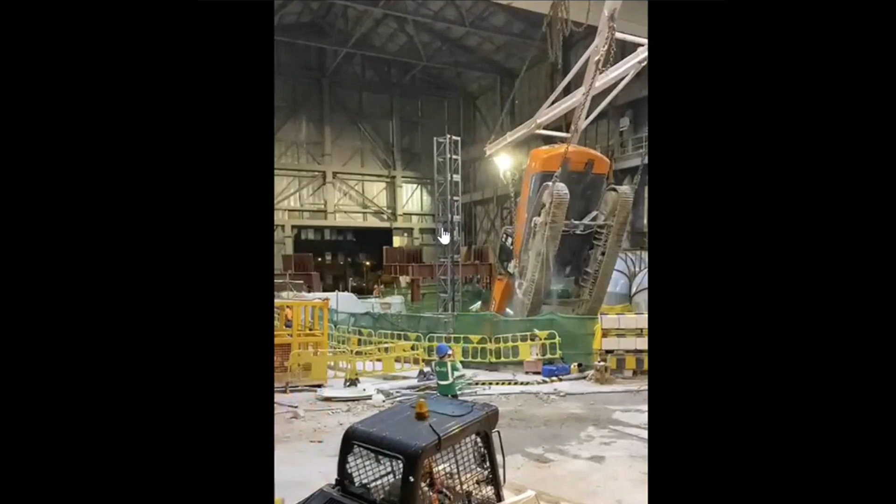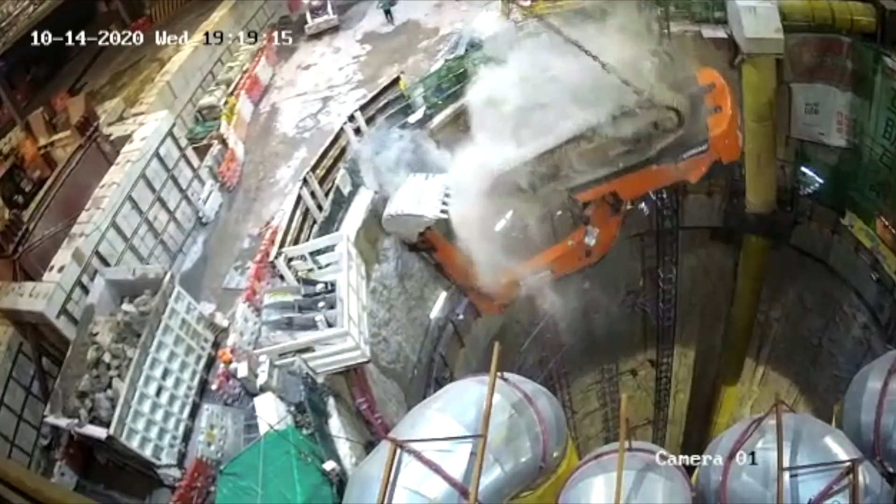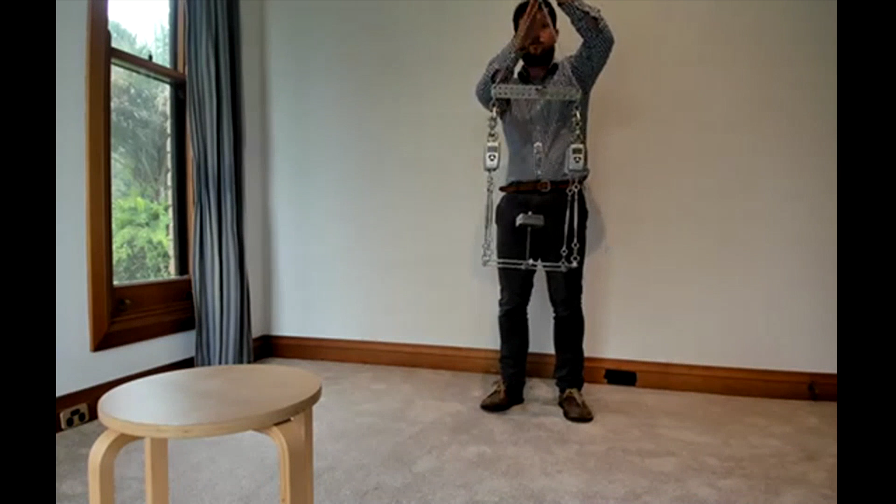So I've seen this happen in real life and from a number of videos, so it's not something that's just theoretical. So this load here, if you can see, I've got it set up. The center of gravity is above the lift points, and I have my slings above. I can wobble it around and it's stable. Looks pretty good to me.

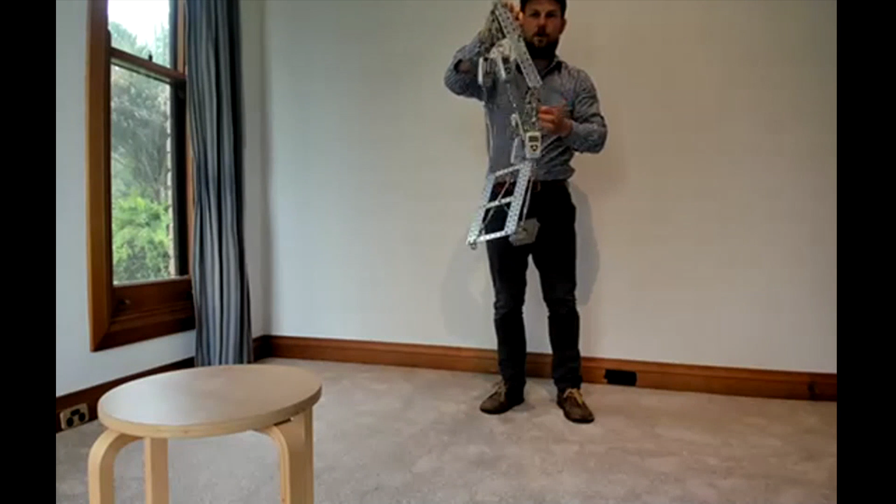If I change that to a lifting beam, the load just tips over. And what's happening is that as the center of gravity moves over, you can see the spreader tips over, which puts more load on one side and it keeps on rotating.

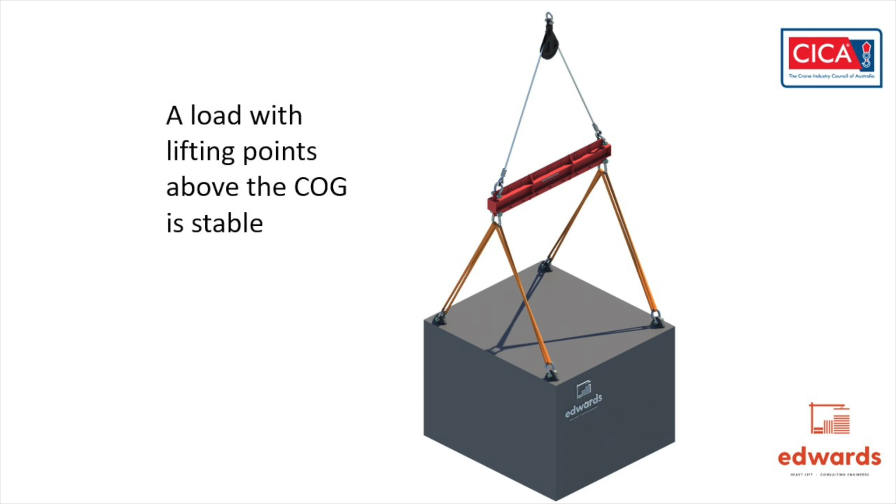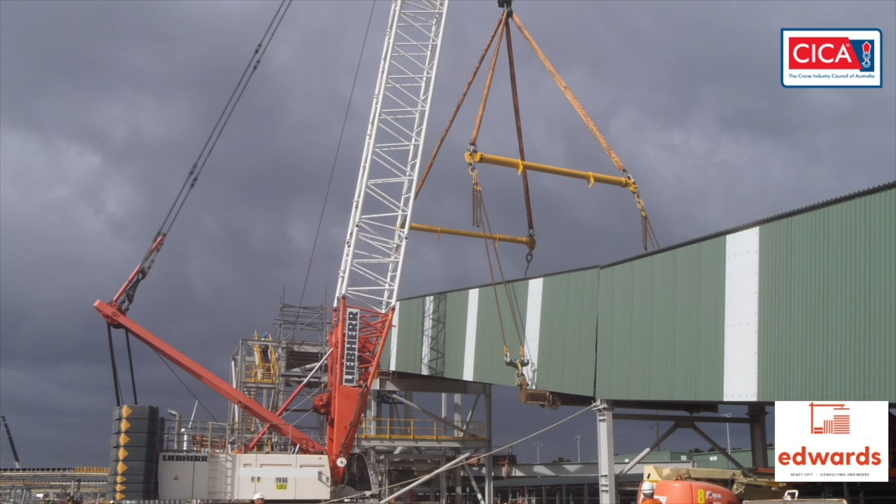This is an example of a lift plan, quite a detailed one. Everything's okay technically as per the lift plan. However, up the top here at the hook, you can see the slings have been run over the top of the hook and back down again.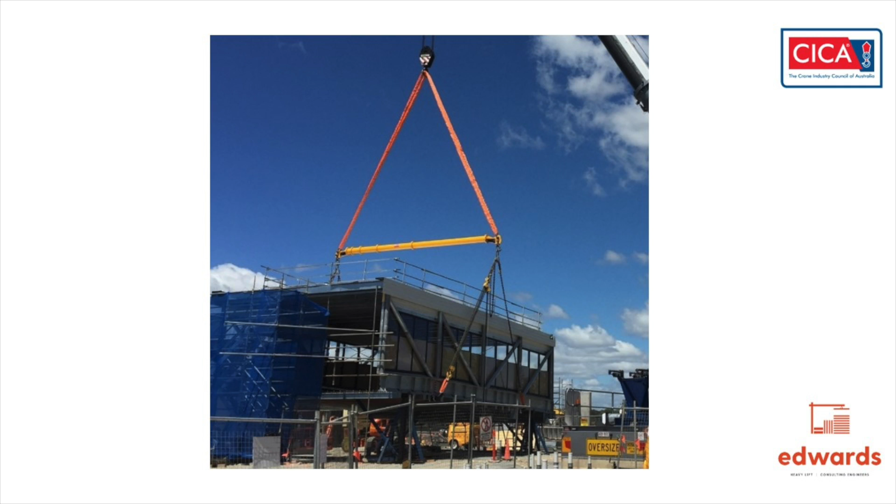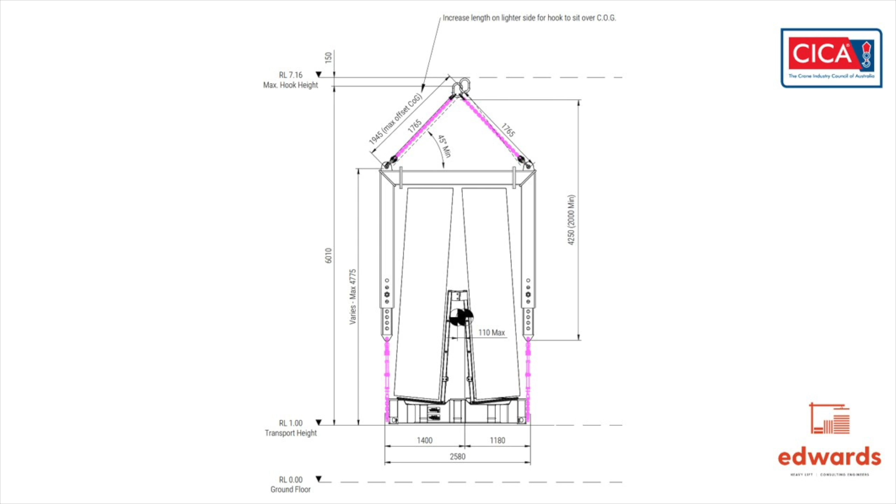This is another example, similar principle. This is something we designed, which I don't think I've seen too commonly elsewhere, where we had a limited head height, so we couldn't put long slings above to match the center of gravity. We achieved that by having a moment connection around this corner with the arms dropping down the side, and that worked quite successfully. Always be cautious if the lift points are below the center of gravity. This is quite a deep beam, so it's probably just lucky that it didn't tip out.

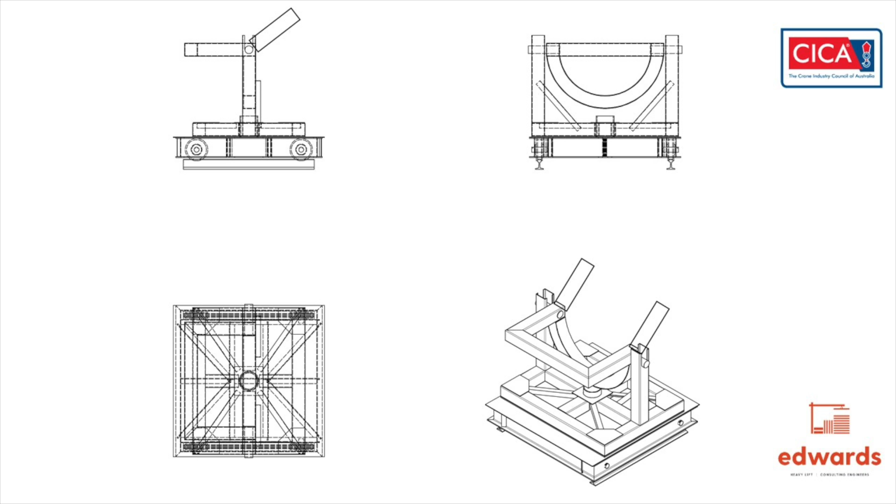So static indeterminacy, a fancy word for the four-leg stool. If you stick it on the ground and the ground's a bit uneven, or you put a coin under one leg, you get the potential for the load to go across just two of the legs. In the rigging world, this is called 'any two legs' in a multi-sling arrangement need to take the load. If it's a three-legged stool, and you stick a coin under one leg, all three legs still touch the ground and they more or less maintain their same load share, apart from any geometrical change from it tilting over.

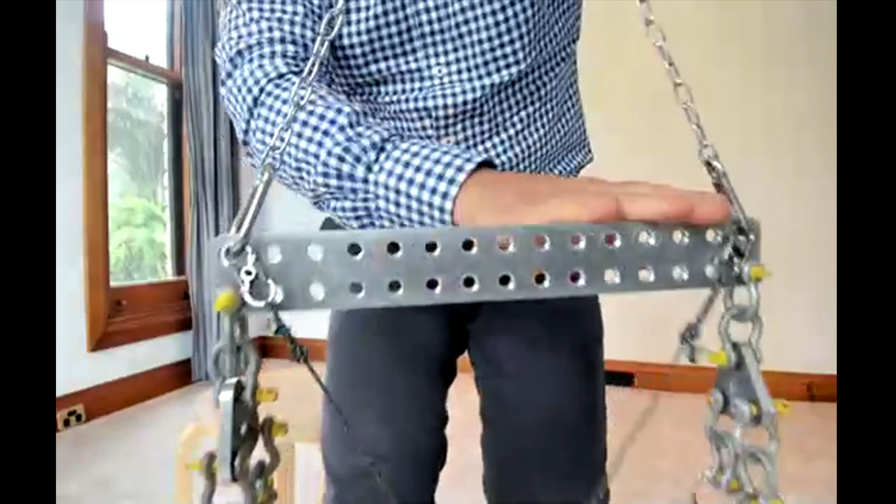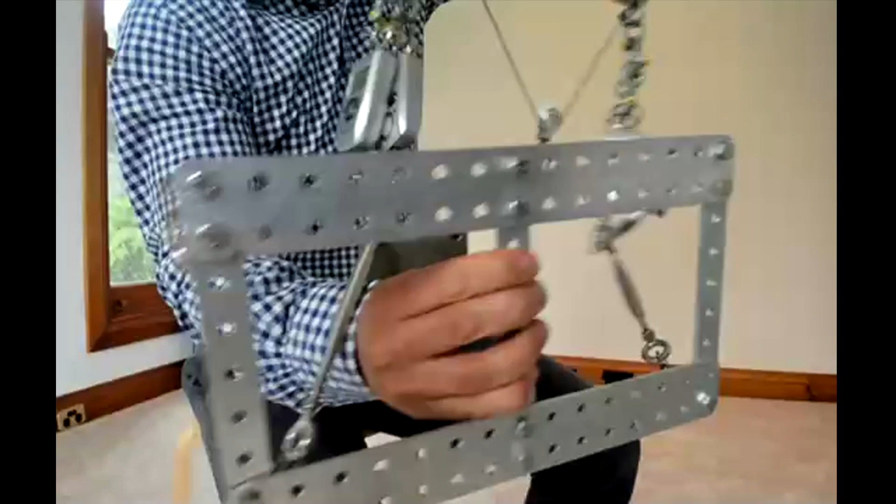I just want to show you an example - a whole presentation could be done about this. I have the same rigging arrangement here. We've got a spreader bar across the top, and we also have what's called in the industry equalizing triangles. The center of gravity of this load is in the center. I haven't made any tricks here - you can see it's in the center. I'm just going to set the scales to zero, and from all that equalization, with the equalizing triangles and the spreader bar, we should be identifying that the center of gravity of the load is in the middle, and that the loads are the same.

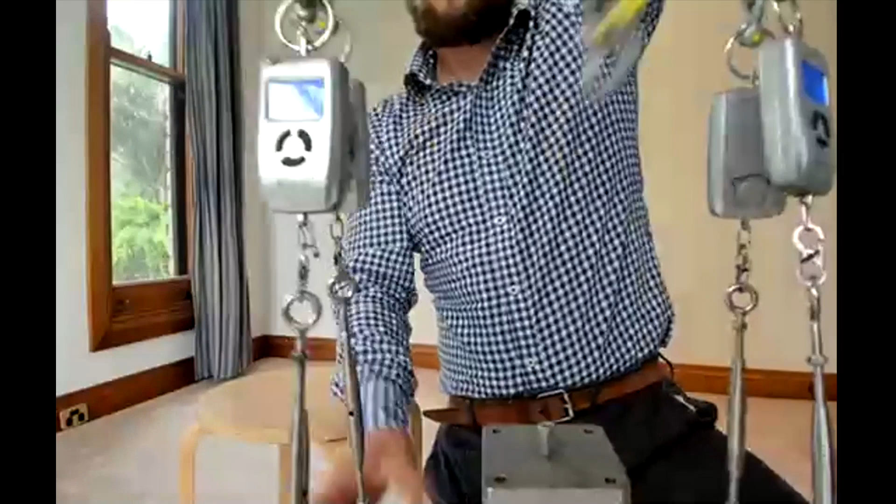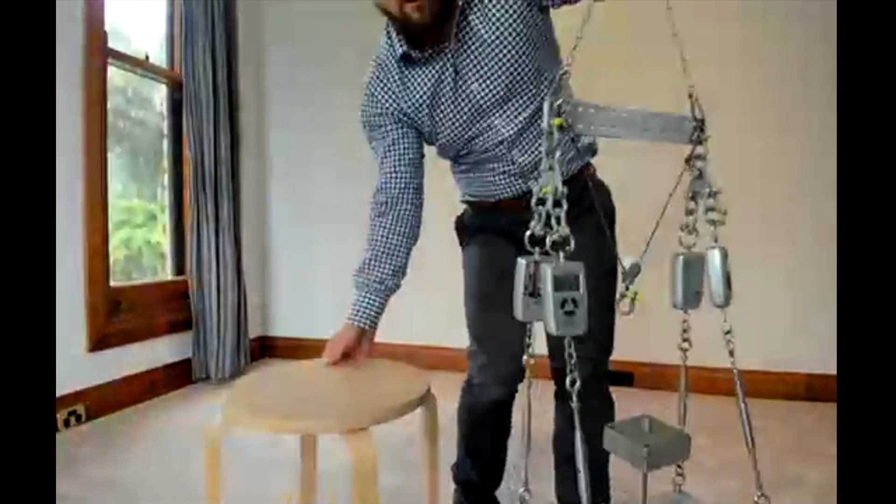We should be identifying that the loads are the same, but not sure if you can see that there. 850 grams, 400 grams, close to 400 grams there, and 800 grams there. So we have these two diagonally opposing ones taking 400, and these two diagonally opposing ones taking 800.

The reason this is occurring is the length of these slings is not exactly correct, which matches real life - the allowable tolerance of a sling is 3% of its nominal length. Looking at this triangle here - not sure if you can see it - this triangle has rotated a little bit because of the slightly different sling lengths, and because this side is closer to the center line, it takes more load. So that needs to be taken into account, not just for the rigging arrangement, but also for the lift points. It could be any variation - 4 slings in a line, 4 slings in a box pattern as I've shown, etc.

This is a detailed lift plan example, just to finish things up now - there's 23 pages. Trying to keep them as condensed as possible is always my theory. A sign-on sheet at the front, a data sheet like the CICA one, a checklist, extracts from the charts that the operator can refer to, the load information. So basically this shows that the load has been structurally approved for the way we're rigging it, a rigging diagram, and then some general arrangements, and finally the applied bearing pressures and the allowable bearing pressures.

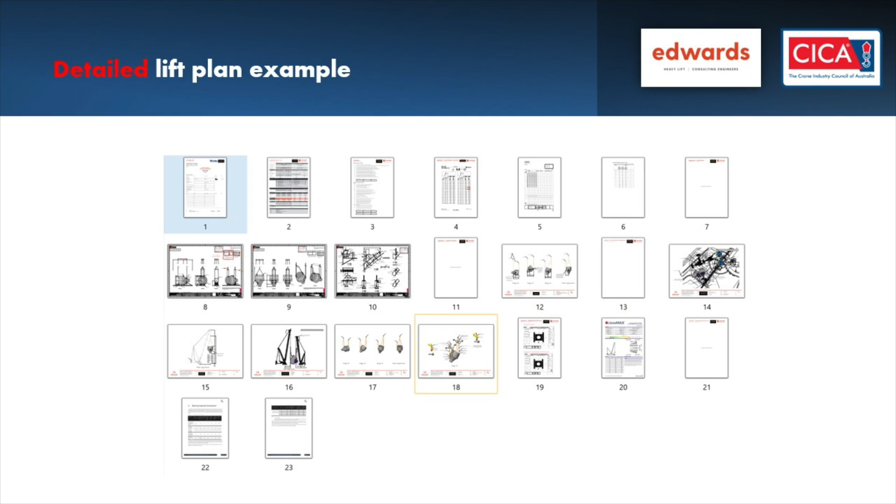The data sheet shows the configuration of the crane at the top, its boom length, its configuration code, and the hook details - that's just the capacity of the hook.

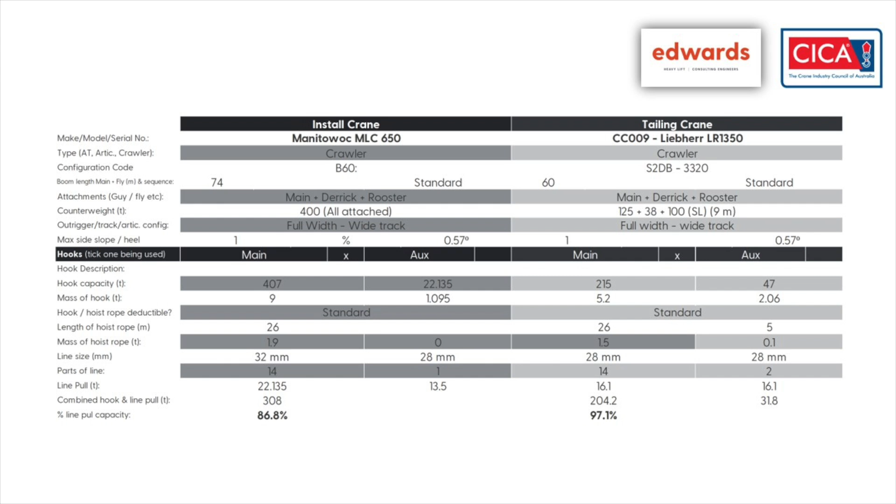The hoist rope in this particular crane is not included in the chart capacity, so we allowed for the hoist rope. We're checking the total line pull and parts of line - how many times the hoist rope is reeved up on the hook - and similar for the other crane. The rigging, we're just going through a weight takeoff of the rigging and the weights.

These are the attachments, typical data showing pick, tail and place. The interesting thing you'll see here is the tailing for the main crane - we've only got a 1 factor, not a 1.2 for a multiple crane lift. There were various control measures we went into to determine that this was acceptable.

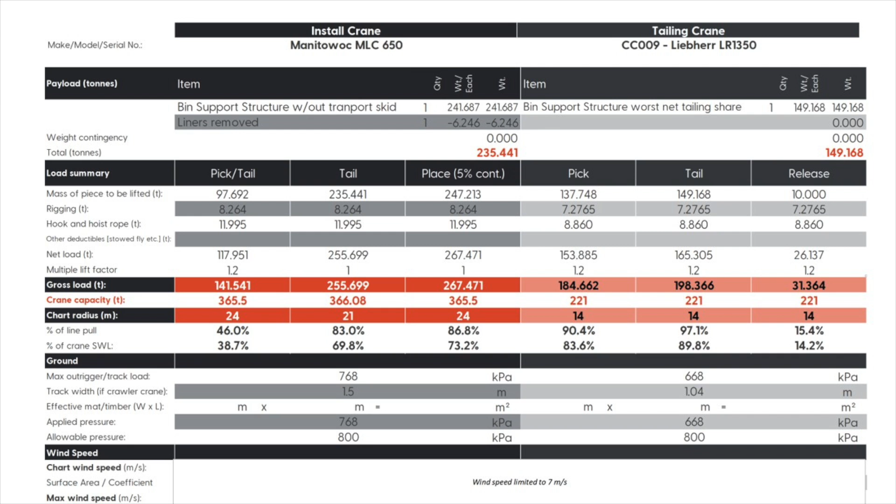The other interesting thing about this, you may have picked up that halfway through the lift, the slings actually touch the side of the load. There are some engineered designed big round things that are borne on.

The interesting thing is at the start of the lift, the tailing crane gets 137 tonnes, but partway through the lift, the load actually increases to the tailing crane.

The other thing that happens too is the center of gravity goes above the line of action between the lift points by 92 mils. So we need to have control of the load in the top main crane to stop it from tipping out sideways.

And then when we get to this point, the load share changes again. So some quite detailed calculations - you'd probably put this one, because of those elements, into the engineered lift category.

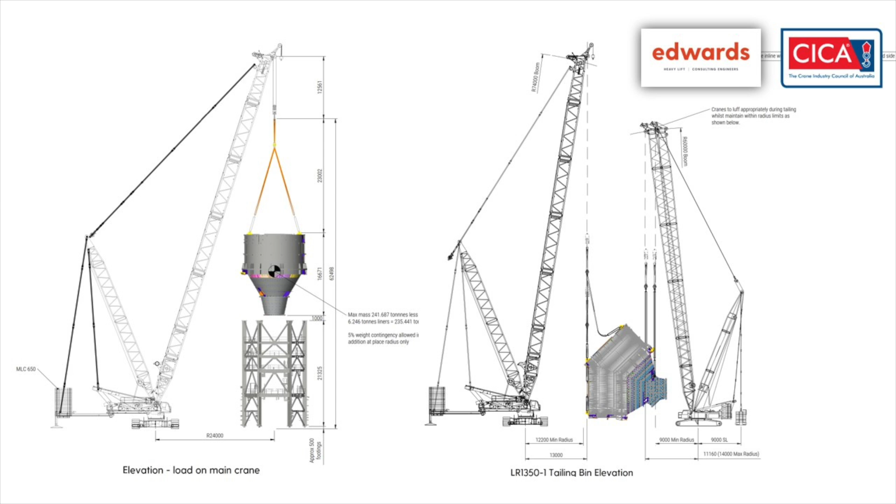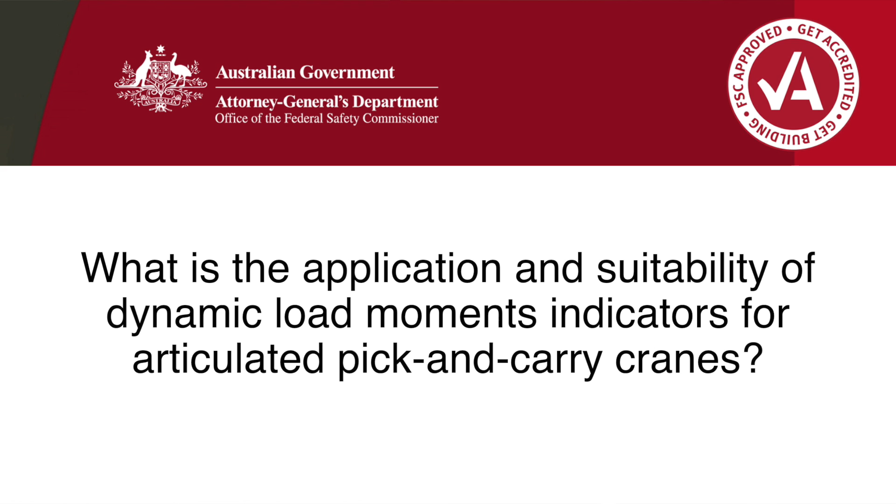One was in regards to you particularly, Brandon, and it asked: could you share your thoughts on dynamic load moment indicators for articulated pick and carry cranes? There are some companies that have mandated these. Any comments that you might have on that?

I think the dynamic load indicator is an important advancement because it incorporates side slope, but I don't think it provides anything for lift planning, because it only tells you the current state. It doesn't tell you what's about to happen - it tells you what already happened or is happening. So to treat that as an alibi to...

I think that, like many things - we talked about some of the artificial intelligence as well - it may have a perverse outcome. I think that it alone is not your get out of jail free card. It's an advancement, it's an improvement, but it can't be seen as something that does anything more than tell you when you've got a change in circumstance.

That's why I was trying to highlight in that lift planning, trying to show a more simplified version of the dynamic load indicator in the plan that says these are the potential capacities that might fluctuate through the use of an articulated crane. And that has its own limits, because all those things are based on an assumption of 5-degree slope or less. So if you go into side slope that's more than 5 degrees, well, all bets are off - you can't use that chart anyway. That's probably my only criticism.

I think it's as you heard Stuart say before, about the 360-degree chart - same principle with slewing cranes. The dynamic capacity that they give is great, but if you rely on that to be the new capacity everywhere, you'll find yourself in an overload condition or higher capacity utilization than you maybe intended at a different slew angle.

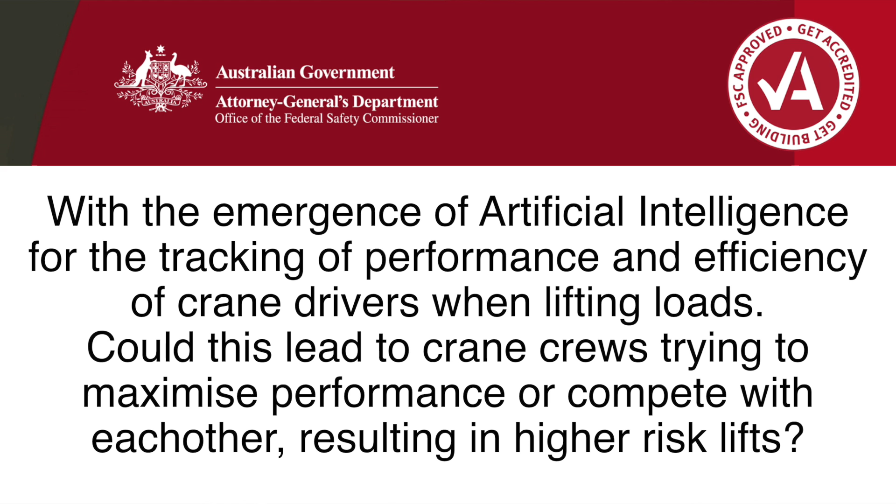Thanks for that. There was one other question that piqued my interest as well, because it wasn't something I'd thought about, and it came from Sam, I'll read it. With artificial intelligence just starting to come into construction, one area being seen is crane efficiency - it monitors performance and efficiency of the crane driver lifting loads. His question is, where there are multiple cranes on site and you have this technology, do you believe it would be a safety concern as crane crews try to outperform one another, knowing they're being tracked by the artificial intelligence, and possibly lead to safety incidents, the complete opposite of why we're trying to bring it in? Any thoughts on that? Any comments?

Yeah, I've seen some pretty perverse outcomes from safety systems. As an industry, we've got to get back to giving training and skills and a career path to learn more and more to the guys in the field, because when I started in the industry, that's where the skill level was - it wasn't with the engineers per se. Over the last 20 years, people have taken more and more of that planning from the operators. I can think of many examples, like that example of the Franna on that civil contractor's site that had the latch lock system, and the crane operator told the computer the wrong information on purpose to defeat the safety system. Obviously that's another behaviour that needs to be managed, but the culture that goes around - I can get a computer system that will make robots out of crane operators and it'll be safe. It couldn't be further from the truth. It pushes people in the other direction, is my personal feeling.

Efficiency and productivity, we've got to be careful not to create a conflict with safety, because I think sometimes this artificial intelligence space is really interesting to pontificate on, but it doesn't account for how organic lifting activities are on site. Like Stuart gave a quick example, even when talking about load stability, about the plan being to do it a certain way, and once it gets to site, it's a question of, we don't have the spreader beam, can we use this lifting beam instead? That kind of stuff, I think, needs to get probably better in control before we try to start using artificial intelligence in that space, because so many things are a mix of variables that contribute to lifting safely.